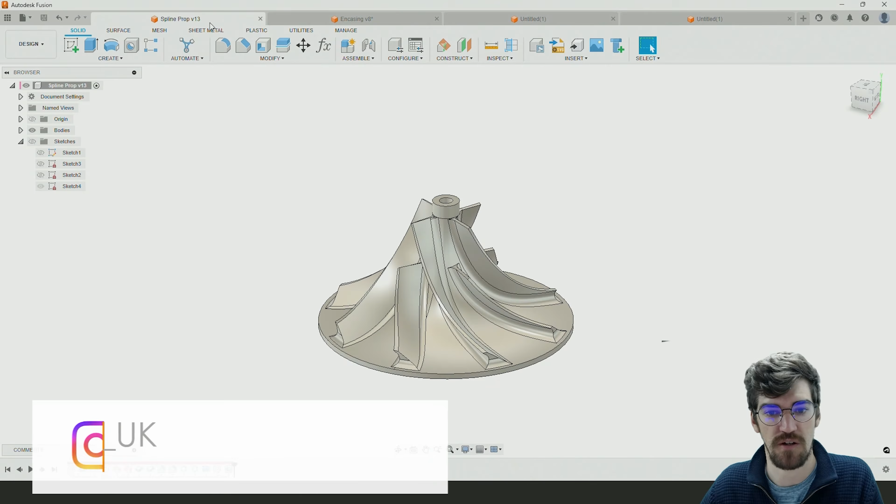We're going to start off with the propeller itself, or the turbine itself, where we want to create this component, or at least a lot of the detailing, just to simplify things. We're going to just do a lot of the detailing of the propeller itself on a single sketch. So I'm going to start off with a 2D sketch.

We always want to begin by starting with the 2D geometry that we want to then bring in. Unless we have the parameters, we might want to go and place down parameters first. But for the sake of this one, we're just going to start with a 2D sketch.

I'm going to be using the side or the front plane to design this from, because I'm going to be designing from the front, but obviously choose whichever plane you find relevant for the model you're creating. So the first things we're going to take a look at, if I have a look at the component that I've kind of tested this on...

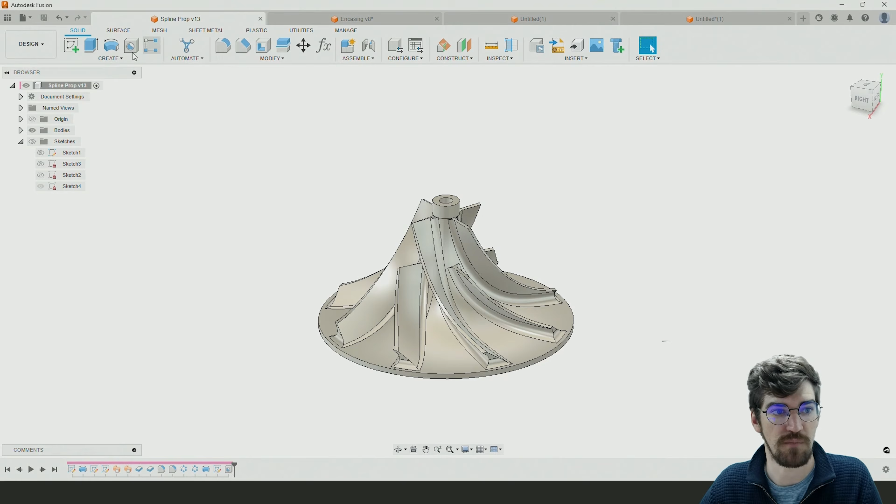We want to obviously have a bit of a thickness to the bottom edge of the root of the turbine itself, so we want to be able to have that little bit of thickness there. We also then need to establish a height, and then we want to be able to have two separate profiles for the root of the impeller itself, as well as then we want to, in the same sketch, be able to determine the shape of the blades themselves.

By simply going in and adding in our lines, I'm going to start with the line tool up at the top left and start from the origin. We always want to try and model as close to the origin as we can, or at least for dimensioning purposes. In components, we want to be modeling around the origin.

So I'm going to go with the first line straight out from there, to an amount. I'm not too worried in this phase, it's a conceptual phase at the moment, so I'm just going to be placing out a few dimensions, more or less to the extent of the outer part over there.

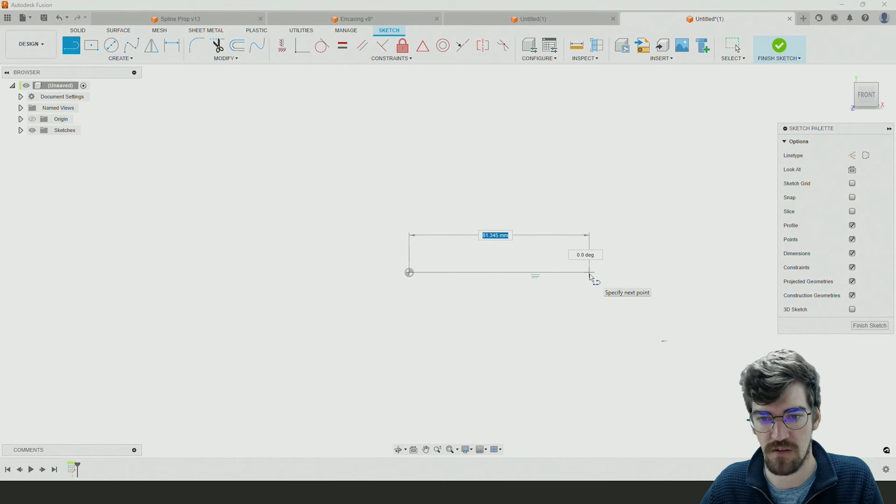And I'll go straight up from there to create that little bit of a thickness towards the bottom of the part, and then I'll come in with a spline of some sort along the way. For now, I'm going to hit escape to finish that line off, and then pretty much do a similar process on the top half of the component.

So going straight up for the vertical edges of the part, going straight up by, again, an amount. I'm not going to determine exactly how much just yet, just going to go straight up.

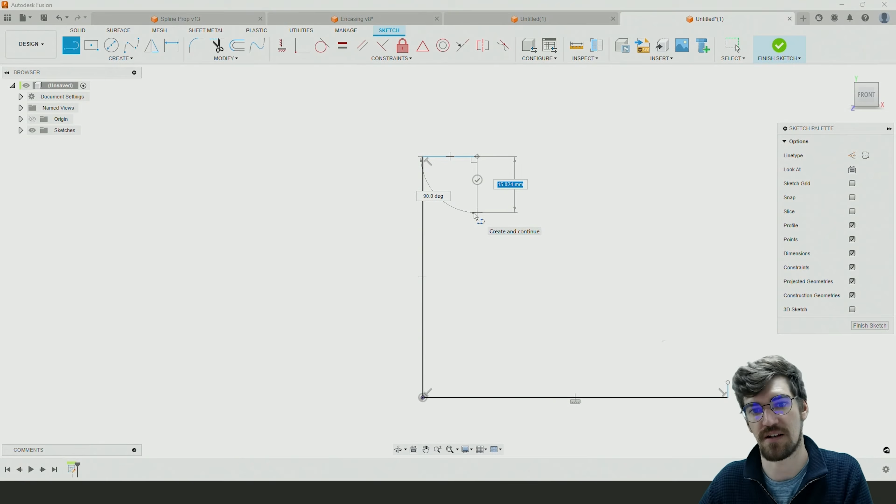Going to have the upper diameter of the cylinder itself, again by an amount. Come straight down, because I want to have at least a little bit at the top before it then goes down into the root, and place it in something like that.

Now, to finish off this curvature to the component itself, I might have just a little bit of an edge going in on the end of it over here, which will be variable later on down the line, but I want to have the option for just having a straight edge over there.

And then I'm going to use the new blend curve tool available to us, just to be able to connect those two lines together. This will connect any two lines with a curve. So you select one half and then the other half, and you've got the ability to then go and place both of those in. Just by selecting the nodes at the end of that line, I can come in and adjust the intensity of that if I wanted to.

But otherwise, as these lines move up and down, those will continue to be tangential to the vertical and horizontal lines respectively, allowing us to keep that nice and neatly in line with itself.

Again, the next step over is we want to create the geometry of the blade as well. So using the same line tool, I'm just going to go off where that tooth starts from. I want to have that set as my blade height from the bottom of the part up to this point over here.

So I'm going to go and specify that this is later on down the line, this is going to be the blade height. So thinking more or less of what I want to add in later on down the line, but not adding too much detail at this particular point in time, just kind of eyeballing it as we go through.

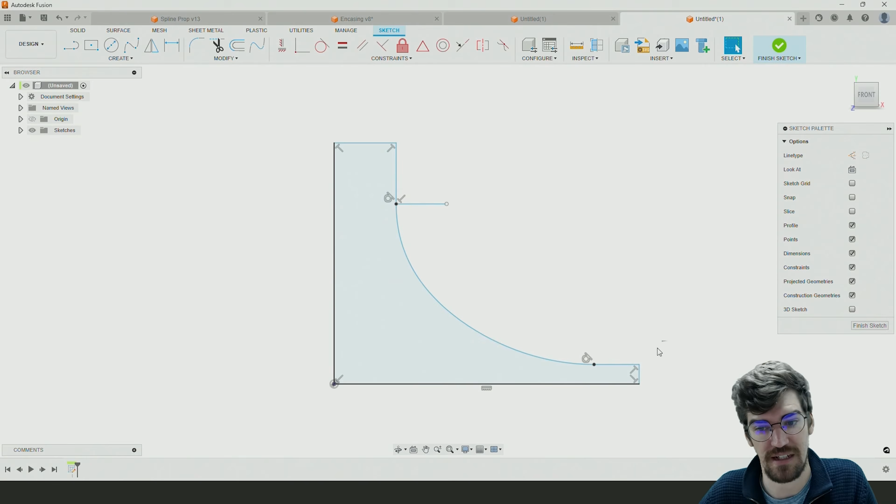I might also not want that linked to that node over there itself. I might want it a little bit further along, making sure it's not snapping to anything. So I'll go a little bit further along and place that down over there if I want those as two separate values.

The next thing, again, just going to go and place in either a spline or a blend curve along the way. So if you want a blend curve, it's not quite going to work if I go between these two points now, because it's going to try and make sure that they are tangential once more.

So what I might do is put some construction geometry in to begin to drive the angles of those as well. By changing inside of the sketch palette to the construction line instead, construction line geometry won't be used in the formation of solid geometry later on. So when we do convert the sketch into solid geometry, the tool will completely ignore any lines that are using the construction line type as a tool within the environment.

So I'm going to use those two construction lines just to drive the angle. You can see that those are using constraints, a series of perpendicular constraints, ensuring that this line is always going to be horizontal, and this line over here is always going to be vertical, again with a series of perpendicular constraints, which we can see highlighted to us in the corners over there.

If you are ever wanting to add these constraints in, we'll have a look at some of the other constraints a little later on, but we've got the ability to add those perpendicular constraints, or if I wanted to remove a constraint, I can select the constraint and hit delete on my keyboard. It will then go and delete those constraints.

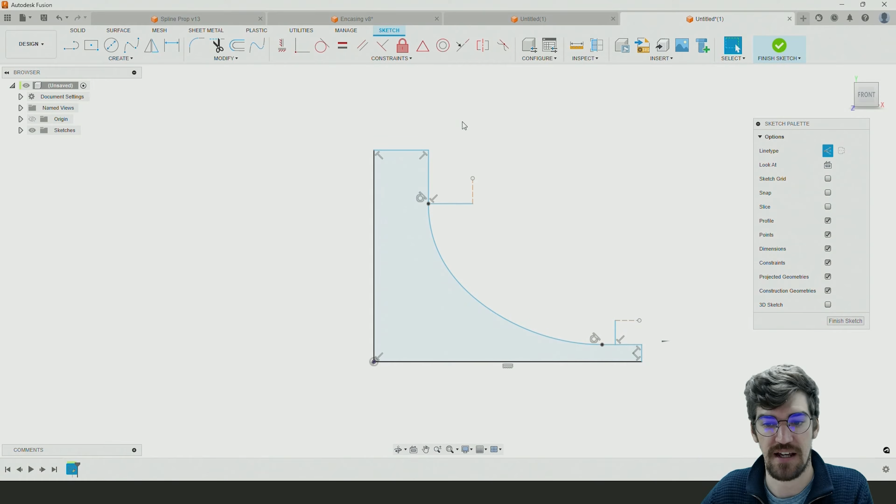And at the moment, that's able to just adjust to whatever it wants to. Same with this one. I could go and force these ones to be either vertical or horizontal by using the horizontal vertical constraint and applying that against each of those two, for those of you that don't potentially know that.

So using the blend curve, I'll just go and connect that line once more to this one. And currently it's a construction line once more, but I can convert a construction line to a solid line by selecting it, and in the sketch palette, disabling the construction line type against it.

Therefore, we've got two closed profiles inside of the sketch as it stands. So we can convert an existing solid line to a construction line, and we can convert the construction line into a solid line if we ever needed to.

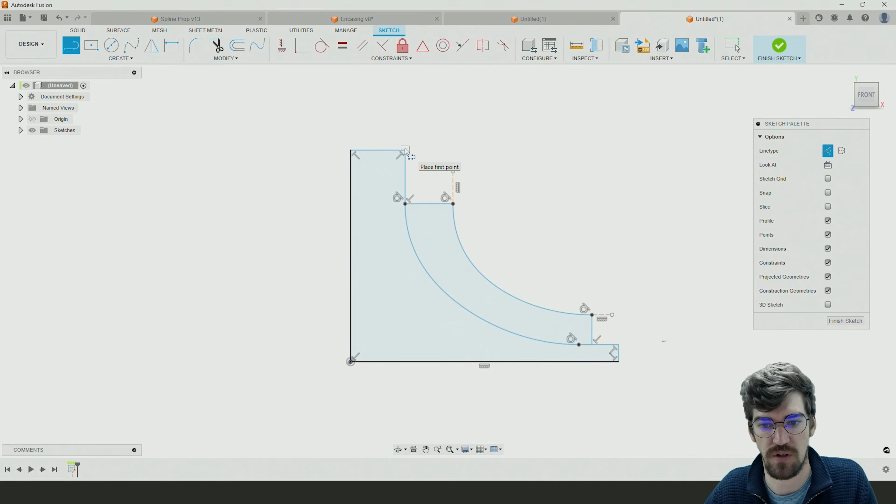The last thing I want to do very quickly on here is just close off this shape, just in case I need it later on down the line. So I'm going to go from my endpoint over here, horizontally across, disabling construction line, and coming down to somewhere in line with that, just in case I need this last closed profile later on down the line to cut any geometry that is unnecessary.

The hope is I won't need to use it, but we'll just have it there in case a little later on. Could always come back and add that in later on if we ever wanted to as well.

Last thing I will do, just for the sake of demonstrating it, for those again that don't potentially know this, if I add a line in here, right at the origin, right in the center of the part, and go straight down or straight up, doesn't really matter as long as it's there and it's vertical, I can convert that solid line into a center line.

When using dimensions, we can use center lines to determine diameters on either side of the center line if we needed to. So as an example, I'll create a sketch dimension between my center line and this vertical line over here. Rather than giving us the distance between those two points, it will give us a diameter.

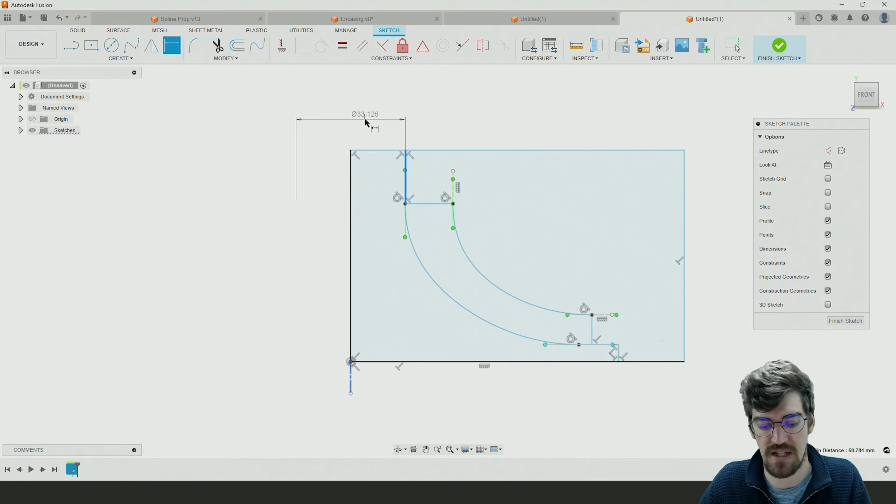The other benefit, which is why I'm wanting to use this one at this point in time, is now that I'm happy with the sketch, I can hit Finish Sketch. And because the type of geometry I'm wanting to create is a revolve, Fusion will automatically detect that center line for me, since it's the only center line available in the part on an unused sketch. It will automatically grab that as the axis of rotation for my revolve, so we can begin to add those in.

It's an extra click somewhere further back, but it might save you time later on down the line, especially if you aren't wanting your revolve centered around the origin, or you're wanting to define a separate center line elsewhere. In this case, we could use the origin for our axis, but just to point that out as well.

The profile we want to use, again, we're just creating this for the tooth for now - I want to grab, sorry, not the tooth, the root. We want to grab that profile and sweep it around. Using the revolve, we've gone and created the profile nicely, hit OK, and now we've got the base for our component. We can later add parameters to worry about the shape, size, and height along the way.

Once we've got that set, the next thing we want to do is start adding the blades on. With those blades, we want to take a profile and pull it up to a certain height, with some rotation to it.

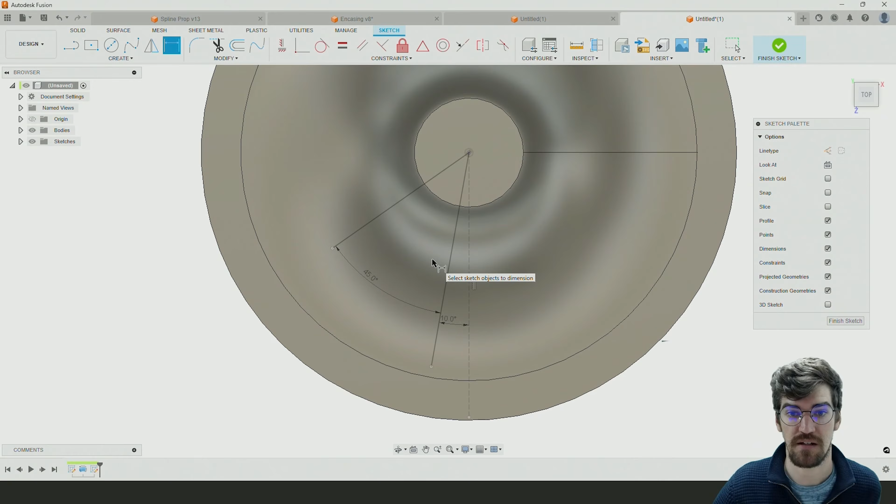Because the component we want to create will have the option for this splitter blade as well, I'm going to create a second line just to the side of the main blade. I'll pull this out to somewhere along there and give it an angular difference of 45 degrees between our main blade and the splitter blade, which ensures we've got the ability to go to 4 blades potentially.

This splitter blade will always want to sit halfway between the two, and later on, when we're creating parameters, we can begin to push those as well. Now that I'm happy with those two, I'll go and hit Finish Sketch.

And we can go and begin to use the surface modeling to finish this off. The last thing I need to make in this model is a path for the sweep to follow along. At the moment we don't have a path for it to follow, and that path I'm going to set right on the origin itself. So I'll create one final sketch, on the origin plane itself.

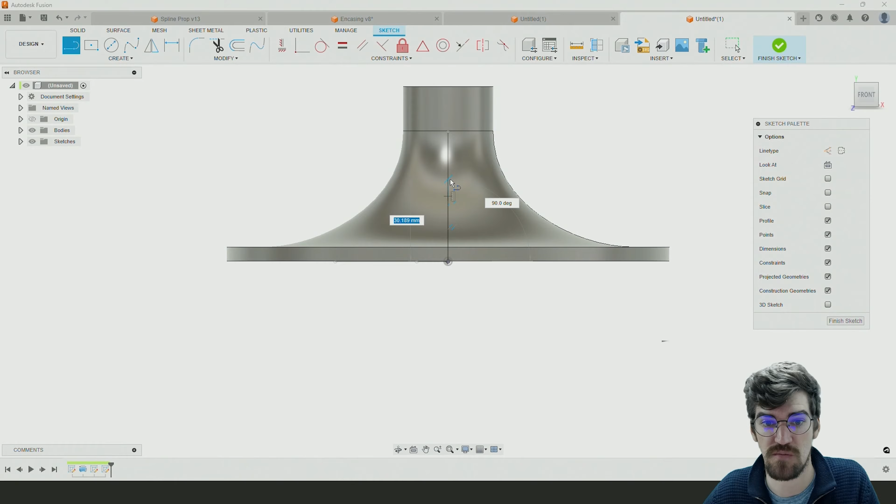The same plane, or the front plane at least, the same plane that we created the original sketch on. I'm just going to create a line that goes all the way straight up to the height of my blades. I'm going to make two separate lines, one for the main blade and one for the splitter blade, so I'll make a slightly smaller one over here, and use the two of them separately.

So now that I've got those two as a guide, I'm going to go over to my Surface tab. Inside of Fusion, we've got different types of modeling available to us within the design workspace. Some of you might only be familiar with solid modeling. We've also got surface, mesh, sheet metal, plastic, and so on available as well.

For this one, I'm going to go over to the Surface Modeling tab to create a single surface rather than a 3D component or a solid object, just to make sure we've got uniformity to this. In the Create drop-down, I'm going to grab the Sweep tool, which is also in my toolbar at the top, to create a swept surface. I'm going to use the single edge of this longer or wider line.

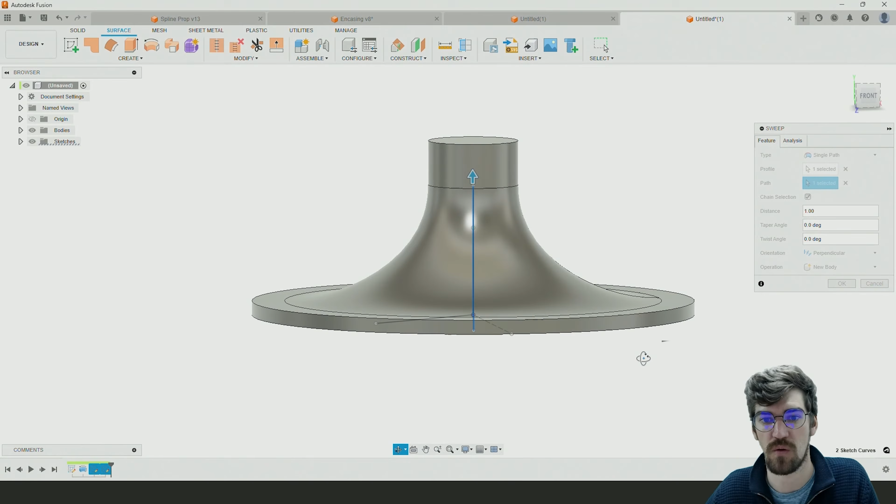As my path, I'm going to use the longer of the two lines once more. You can see it's just going to do a single surface with an infinitely small volume to it, so it's just a single plane that we're essentially creating at this point in time, and this is what we're going to use to drive the overall component.

We've got the ability as well to create a twist angle, so how much we want to twist this by as we go from the start position to the end. If we do 360 degrees, it's going to do a full rotation anti-clockwise around the component. We want to go clockwise, so we can drop that down to a negative value and it'll then go clockwise around. I don't want it to go the full 360 degrees, only 90 degrees.

I want the bottom of the blade to start where the previous one will end. So if we create 4 of these around the component itself, I want the start of one to begin above the end of the other essentially. Once I'm happy with that, I'll hit OK.

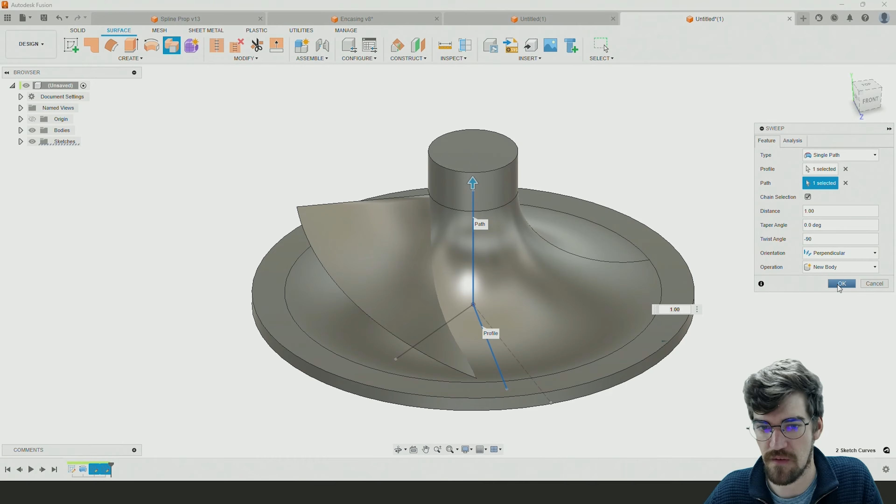Then I'll just repeat the process for the second one. Using the sweep tool once more, I'll enable the sketch visibility against both of those two sketches we created, selecting profile 1 as the driver of the geometry, and then the third sketch line, the shorter of the two, as the driver of the direction for my line.

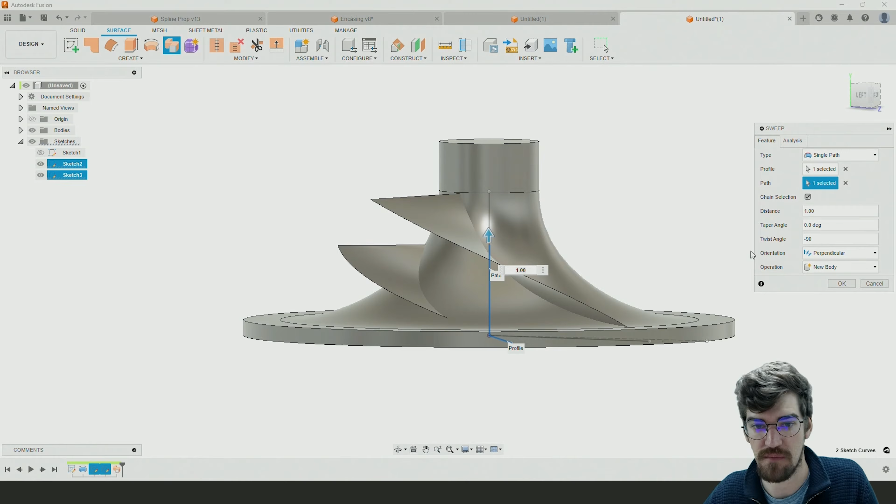Now this one's slightly different because we need to rotate it by slightly less than the same 90 degrees. If we do 90 degrees or negative 90 degrees again in this case, it's going to end a little bit further along than what we need, just based on the height of the component itself, from start to end. So later on we're going to need to work out a ratio between the start and end point for that, but for now I'm just going to leave this as is.

Maybe multiply this by 0.7 just to give it about 70%. So to multiply, I can just type in the parameters times by 0.7, and that'll then finish, for now more or less where we want. We can always go in and adjust these values later on.

Once we've got those set, the next thing we want to do is go in and thicken these two surfaces. Because I've started this surface right at the bottom, I want to thicken towards the top of the part, just so that I'm not going below the bottom of the part itself.

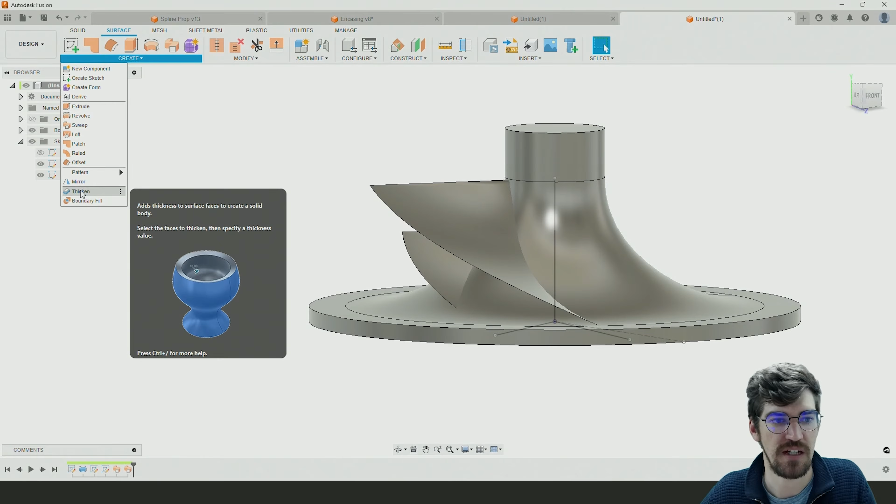To do that, I can again go into the Create section. From the surfaces section, we've got the ability to thicken any surface inside of Fusion. Using the thicken tool, we're going to be creating solid geometry during the process. Using this surface, I'm going to go in the opposite direction by an amount, in this case about 2 millimeters, negative 2 millimeters. I'll hit OK on there to create one solid. It's going to be created as a new body for now.

Actually, I can probably make this as a solid, so I'm going to join this one, in this case, to the original. New body will just create its own single body, which will be able to be edited on its own. By joining it, anything I do to this component might include the root itself.

I'll do the same, repeating the process on the smaller of the two blades by going -2. Again, we can turn this into a parameter later on.

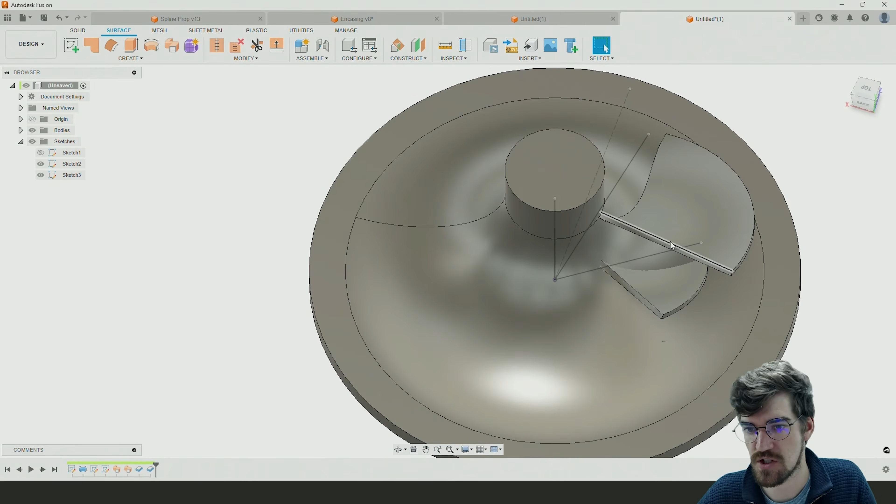Now I can see that shorter blade, though it is smaller, I might not necessarily want it to be narrower. I might want it to be the same full length, but that's easily adjustable now. All we need to do is edit the parent geometry, in this case the line, and any adjustments I make to that line now will be done against the surface.

So we can again start to go in and drive those values based on some parameters. We can add parameters to those and link those together as we go through. Just to prove that quickly, I'll go straight into the sketch itself that is being used to drive this.

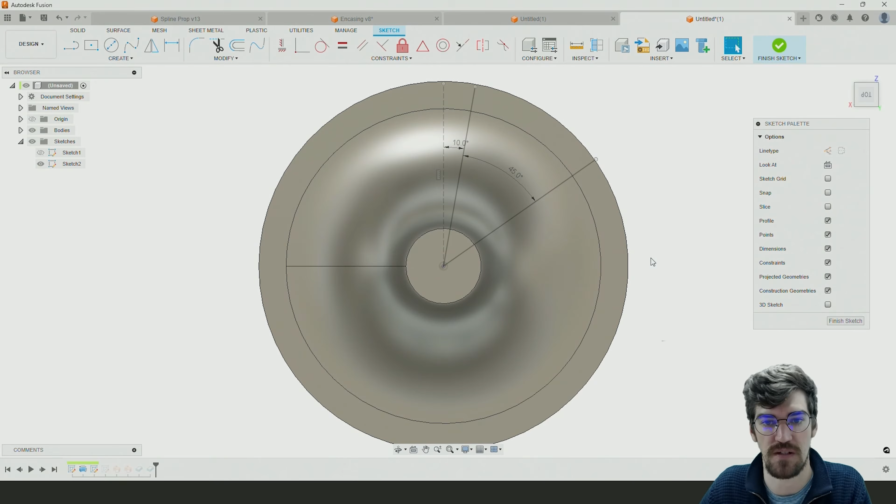We always want the blades to go up to the end, or at least the creation of the surfaces of the blades always want to go up to the edge of the component itself. So to do that, first I want to look at the external surface of the component and add that into this current sketch. I'm going to use the project geometry tool, which can be found under the create panel, project, or include project, or by tapping P on my keyboard, I can grab the project geometry tool.

I'm going to go and project the external edge of the existing component onto my current sketch. I can either do that by specified entities or an entire body - I just wanted the specified entity. I'll hit OK, and it's going to create a projection link.

Anytime that geometry adjusts, so will my geometry on the sketch. I can then drag and drop each of those endpoints onto the geometry itself, and it'll create a coincident constraint between the outer geometry and the endpoint itself. Therefore, wherever the geometry moves, the point moves as well. I could do that manually also within the constraints panel.

I can go and grab the coincident constraint, create a coincident constraint between the endpoint of that line and the outer edge of the part, and if I wanted to, I could do the same on that one. Once I'm happy with that, I can hit finish sketch, and those will be set.

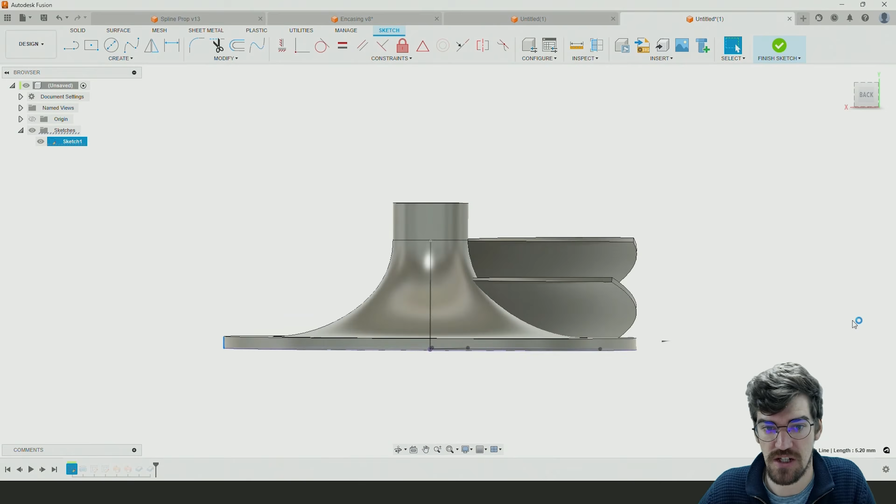To test that even further, I could go straight back into my original sketch, adjust the location, I guess the diameter of the component itself, hit finish sketch, and we should see that that's now wider. Not only is it wider on the original component, but it's also wider on the blades as well. So we've got that link between the two.

The next thing I want to do, just to get these blades the correct number around, we need to go back to the solid geometry tab. We could do this from within the surface create if we wanted, but I'm going to grab it from the solid modeling side. In the create drop down, we have the ability to create patterns of 3D objects, so we'll go into the pattern panel and grab a circular pattern.

The components we want to create a pattern of are going to be each of these blades respectively. For now I want to pattern all of them. Later on down the line we might establish configurations with a splitter blade or without one, but for now we're going to choose both blades as part of this process.

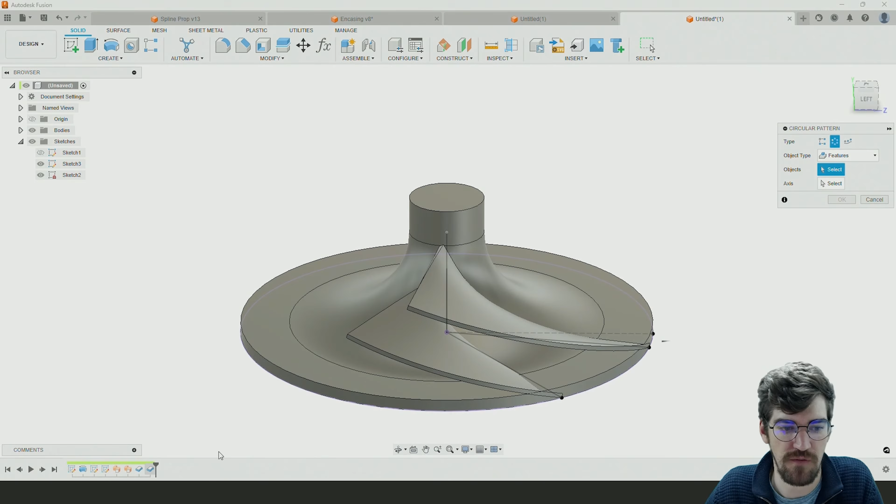You'll notice, because I've set the original surface and thicken creation to join, it's looking for an individual body to pattern rather than a single object. But we can change the object type we're patterning to a feature rather than a body, so I can go and grab each of these two thickens respectively, and it's going to grab both of them at the same time.

The axis of rotation is going to be the same axis we've been using up until now, which is the origin. I could go and grab the origin itself, the line that was used to revolve it, or any cylindrical reference that has the same center point as the component I'm wanting to revolve around.

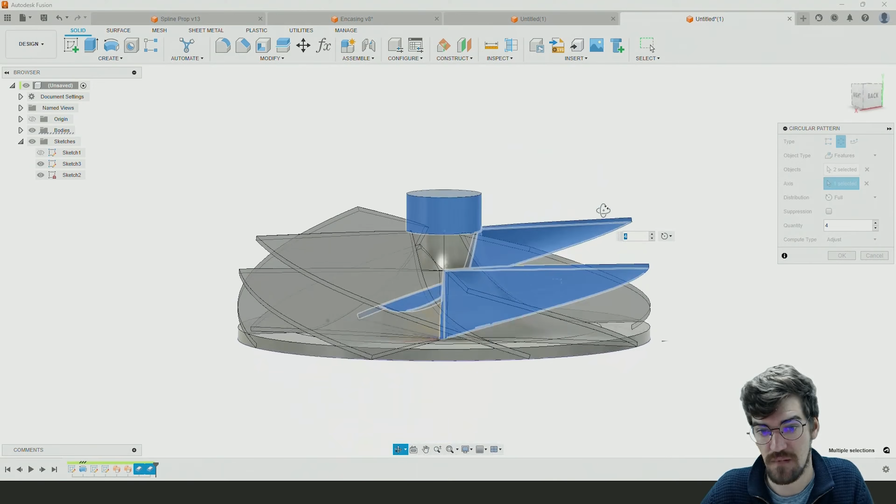Then it's going to ask how many instances of this pattern I want. At the moment there are 3. I can bump that up to whatever value I want, and in this case I probably want 4. Once I'm happy with that, I'll hit OK, and we've now got the blades going around the component itself.

The last thing we want to do to finish this off nice and neatly is cut away the remaining geometry. So we'll use that same profile we created right at the beginning on the first sketch, and then use our combining functionality within Fusion to combine two shapes together.

To do that we can do a revolve once more, but this time including the blade portion of the same sketch. Using my revolve tool once more, the same tool from the beginning, we look at that exact same sketch, and using the original axis that was inside that profile, we go and grab the original profile plus the blades, holding down Control or Shift.

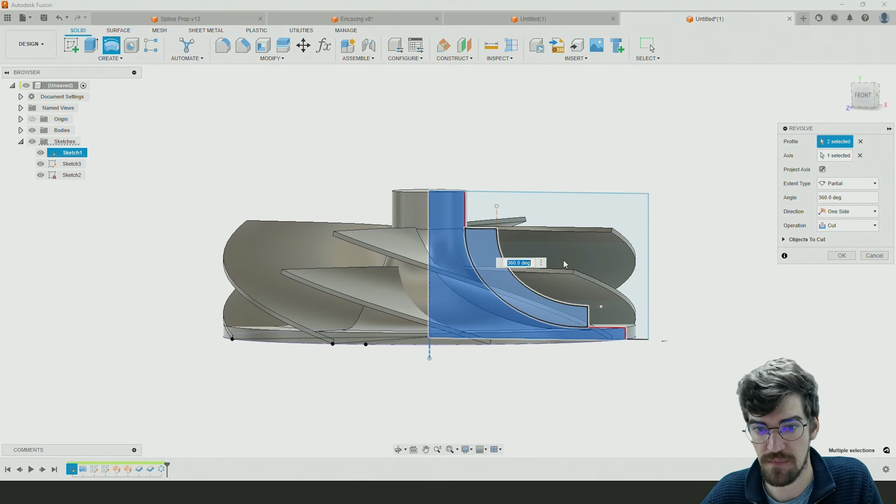Rather than cutting, which is the default anytime Fusion creates a new solid that intersects any other solid—because usually that's what we're wanting to do—in this case we're going to change the operation type, which changes how it views that revolve. Rather than cutting, we're going to use intersect, which only leaves behind anything that was intersected with the revolve we're creating.

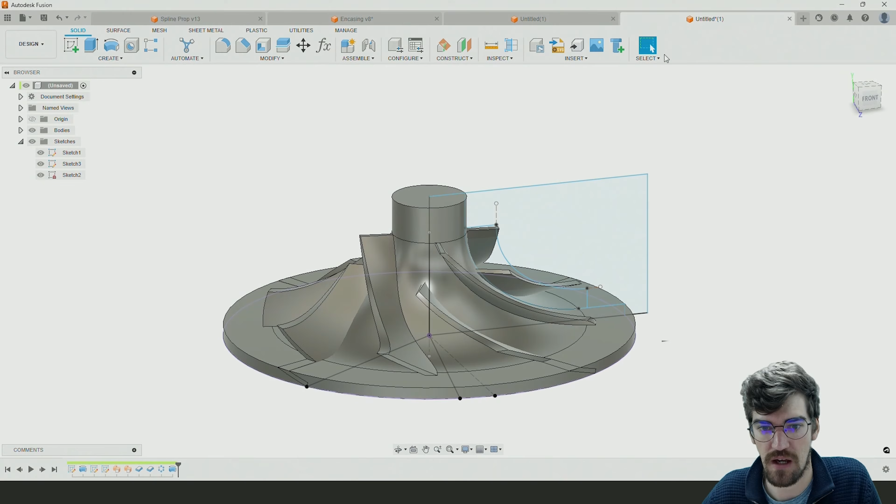Basically it's the opposite of our cut. So rather than cutting away any geometry in the firing line, we want to cut and leave that behind in this case. I'll hit OK, and we should now have our profile nice and neatly set. It doesn't quite look like this one does yet, ours is a little short and stubby for now, but we've got essentially the makeup we need as we go through the rest.

Now we can start to use that same sketch to get a good understanding of where each of those components is located and how big or small they are, their widths and so on. Using that same sketch we've been driving up until now, we don't have to go straight into the sketch to edit it, although most of the time it's recommended. We can start to adjust the sketch directly from the 3D modeling environment.

I can go and drag that up, and you can see by dragging that line up, the 3D model itself is pulled up as well. By dragging the top of the blade up, I can bring this all the way up, and we can see that that's also going straight up.

I'm going to drag and drop that directly on the top face over there, just so that it creates that constraint between the two. It's always going to move up with the top of the sketch itself, and therefore we've always got a line that is vertical, and that blended path is always going to come straight down from there.

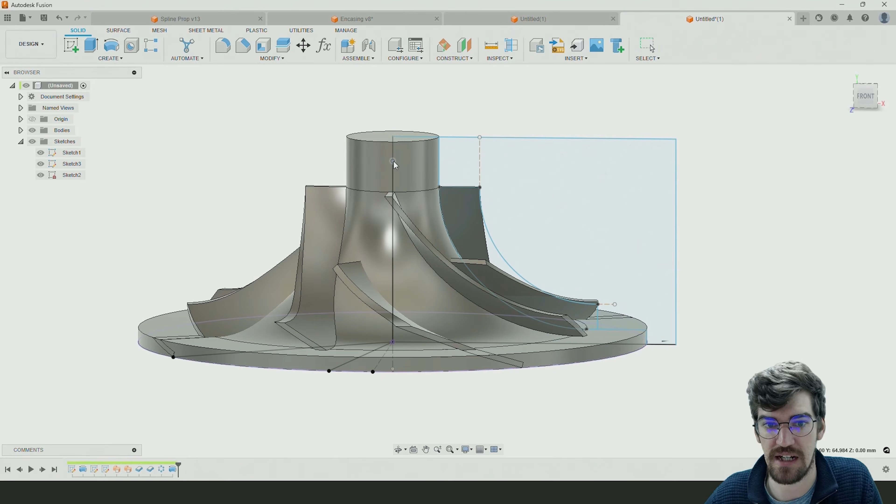This one doesn't seem to be updating all that much, and the reason for that will be the line that is driving the original sweep itself. So if I pull that sweep all the way up, potentially all the way to the top, although I don't necessarily want it to be all the way up, if I bring it a little bit higher up, we're going to have that driving as well a little later on. But you can see by changing that, we can get a slightly sharper incline towards the end of our part, just by adjusting the frequency of that.

We can do a similar thing with the smaller of the two blades. We can drag that up a little bit, and we should start to see the splitter blade do the same thing.

If I pull this out a little bit further, again, I should start to see the blades go out. I'm going to go and drive that construction line all the way to the end, until the outer extents of my part. And then that way I can come in and adjust not only the diameter of the root, but also the diameter of the blades, and even the height and thickness of those blades as well.

So if I want to make it slightly longer, slightly shorter, we've got a fully adaptive model now that we can begin to work with. And that's essentially the basis of what we want to do inside of this. Yes, we've got a few components that fit together in a bit of a messy way, but for now, this is essentially what we're wanting to make use of in terms of the creation of the component.

Once we then start to add a bit more detailing, we can come in and add some filleting just to neaten the corners off to make it a bit more manufacturable. We can start to add parameters and toggles to switch between those two.

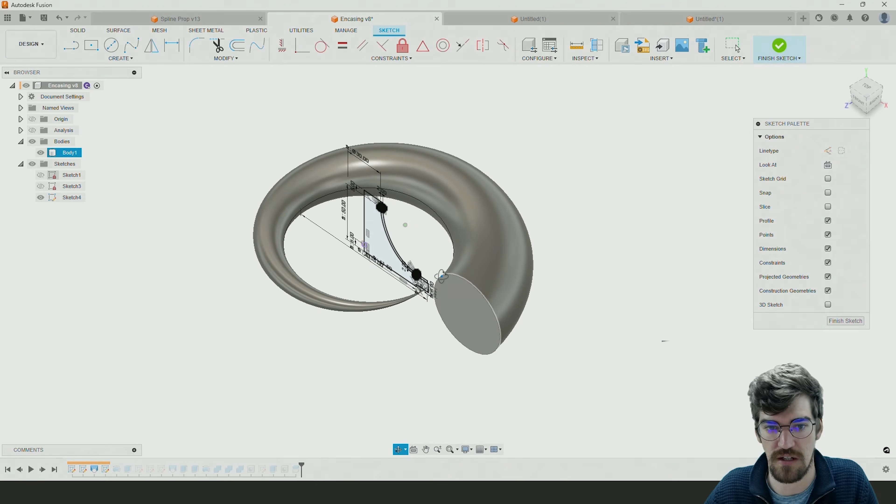The other part that we want to make, which can be a lot heavier in detail, is the encasing itself. If we look at how we've created this one, we've got a single sketch that drives the core of the component, the core profile of the component, and then we've got a secondary sketch that's going to drive the cone. As it's pulling the air in from the top and distributing that out, we've got a cone that's going to need to be created as well.

And then on top of that, to combine the two shapes together to get the input, push it out to the output, we've also got a loft that is connecting the two together, and that's going to be using a single round diameter that we want to be able to specify. That's then going to go into a conical shape while revolving around itself. So we want to be able to create all of that geometry as part of this process.

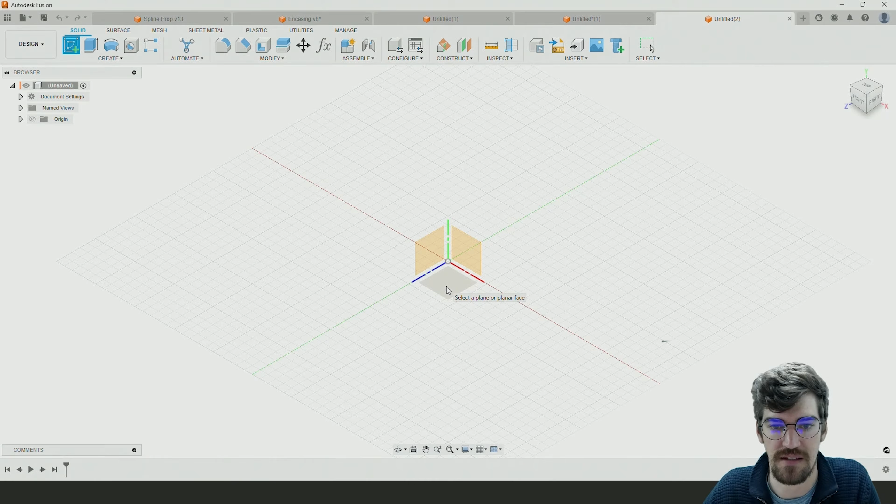So I'm going to go and create a brand new component, again using the plus icon to create a brand new design. Once more, we're going to start with a 2D sketch. This time we're going to be on the ground plane to try and get the layout of the output nice and clean to begin with. So I'm going to go and place my 2D sketch right on the top, looking at the top down.

Using a center diameter circle, I'm going to first specify the radius that I want for the housing itself, for where the impeller itself is going to sit. I'm not going to worry too much about sizing on this one, but I'm going to say it's going to be more or less 90 mil, maybe 95 or so. So I'm going to place it somewhere like that.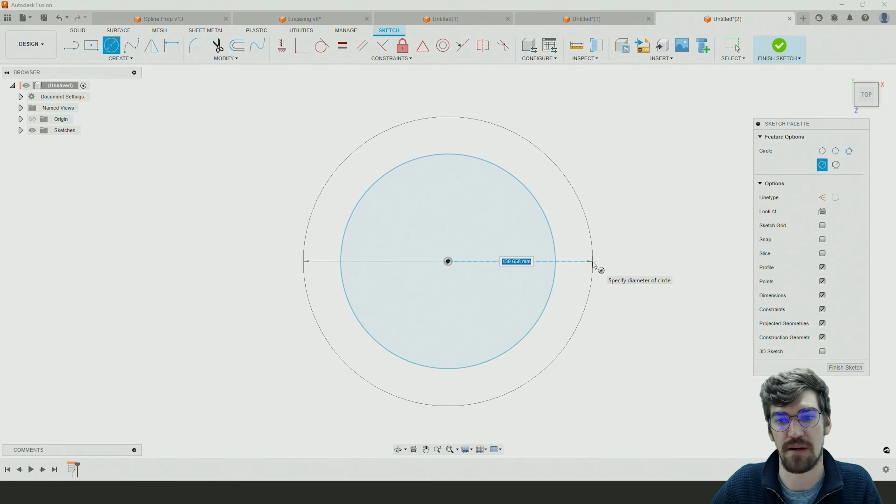I then also know that I want to have a bit of a gap from there to the center of the channel that the output is going to be located at. We want to then have that push out, so we're going to have a little bit of a lip, and as the cone comes out from there, it's going to have a little bit of an offset as well.

So it's going to go out. We've got that at about 90. Let's go around 130 or so for now, and place this one right over there.

I'm going to go and change this line to a construction line so that it isn't taken into consideration during the creation of any solid geometry later on. Then we're going to establish a final location. We want to go straight out from there, using a line tool rather than the circle tool, straight out to that point. Again, as a construction line, just to get a point in space that we can begin to take a look at.

The way we're going to do this is try and reverse calculate the starting point and the center position of the output itself. Because we want to be able to drive how wide the diameter is at the output, and everything else follows in from there, we want to first specify where that output point will be located, and the rest will follow from there.

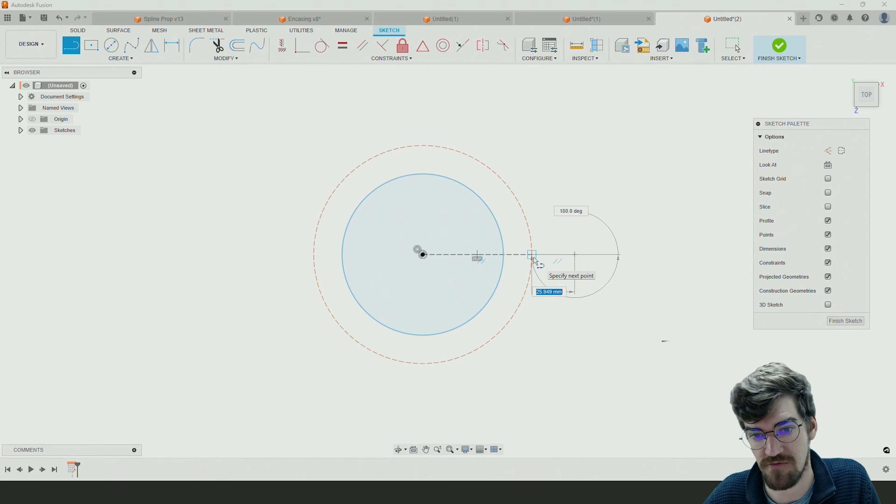So if we know that we've got a diameter of around 50 mil, we then want around about 25 mil at this particular point in time. Hopefully that makes sense, but essentially what we're doing is going into the sketch and creating this line to specify the center of the diameter of the output.

So if I go out of the sketch very quickly and toggle that first sketch on, we've got the center of the cone itself right over there. And because we want to reverse calculate that, we need that point first, and everything else will essentially follow from that.

So what we want to do then is come into our create panel, and we're going to try and create a spiral from the start point over here and slowly work its way out to this point over there.

So we're going to go into the create panel and grab an arc tool, then grab a center point arc. Because we know that we want the arc to be slightly larger than the radius of the driving line for now, we're going to start our center point arc. We also want it to be tangent to the center line of the channel itself.

So I'm going to go off to the side over here very quickly, by an amount I'm not too worried about yet, and place this point over there to start off with, ending vertically in line with the center itself. I then want another arc that's slightly longer than the original, so I'll go off ever so slightly, place that point, and go again another 90 or so degrees. I'm just going to repeat that process until I have an arc that will be in line with this.

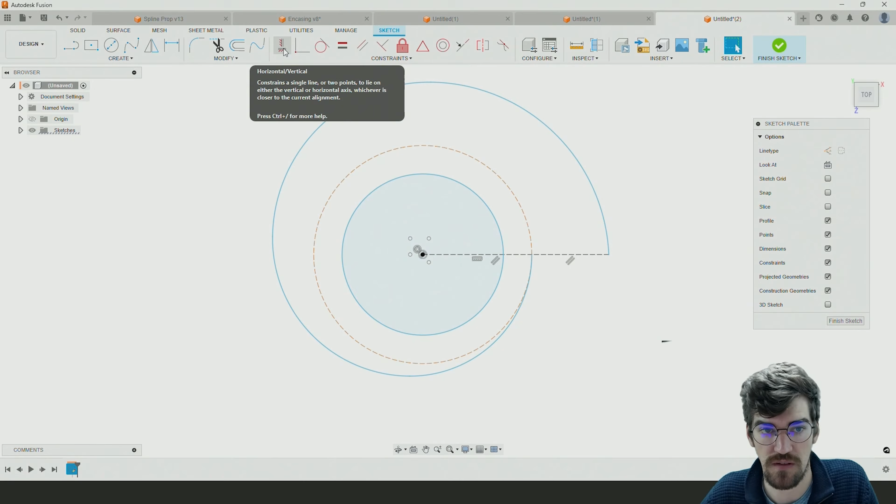So I'm going to then drag those two points so that they're coincidental with each other, the end point of the arc and the end point of my line. I'm also going to ensure that these arcs are always in their correct position, using the vertical and horizontal constraint between the center point of each arc and their end point.

So grabbing this line, this point over there, I'm going to align these two vertically. This one over here, I'm going to align vertically, as well as these two over here. Then repeat the process, this one to that one to that one, this one to that one. So vertically aligned, horizontally aligned, vertically aligned, horizontally in line. That way, as we adjust one, it should start adjusting the others as we go through, keeping those in position.

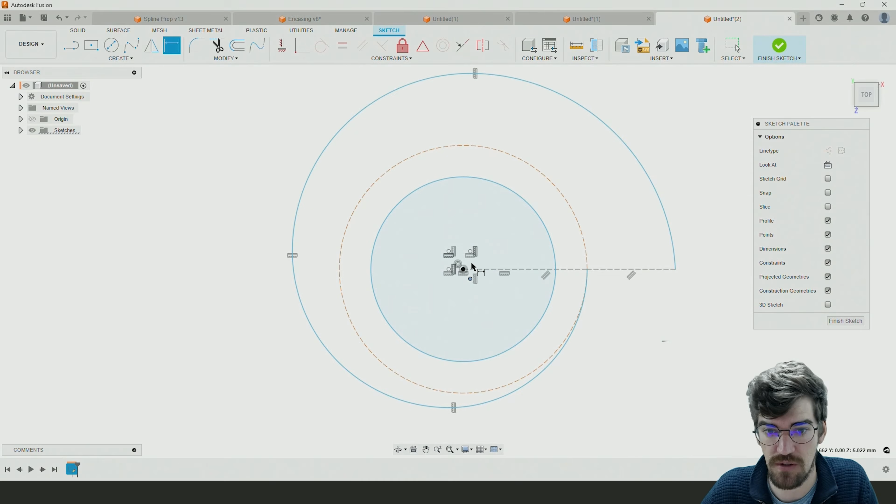At that point, we can then start to establish the ratio between each of these components. We can go and say that we want to dimension these two — I'm not going to worry too much about the exact value, but for now set these to 15 millimeters. We then want to take the remainders and halve that each time, so I'm going to take the distance between these two and say it needs to be equal to whatever value this one is, divided by 2.

Then I'm going to repeat the process between these two and say that needs to be divided by 2. And then lastly, this one to that one, which is equal to that one divided by 2. That way we tend to get a really nice curvature to those, ensuring that these are all going to be tangential to each other whilst increasing the radius.

You can decide on the ratio that you want. We can add parametrics in there to make those a bit better. But now by driving those, you can see how it's able to establish the shape and size of these components for us.

By driving the radius or the diameter of this center line, we then also get to drive each of those. So if either of those begin to adjust, they'll start to push each other to various distances.

We can then also begin to dimension between these two points using that line over there. And you can see that as soon as I start to drive that, if I say for now I want that to be 25 millimeters, it doesn't quite like that one - a little bit over constrained. I'll just go and delete that one.

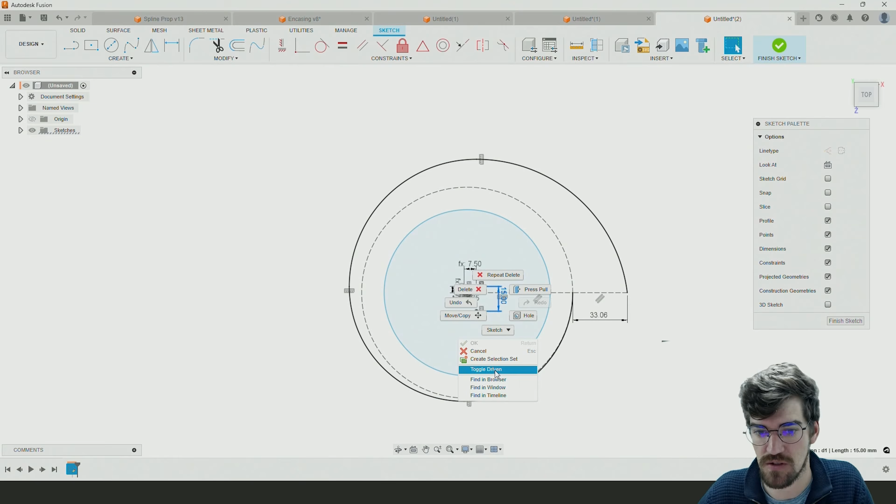Actually, rather than deleting, what we can do is toggle driven. So rather than this one being the driving dimension, I'm going to toggle it driven, and make sure that this one is the driving dimension. See if that fixes the issue quickly. There we go, and now the rest of them are all going to be driving.

So from there, we've got a nice way of being able to drive all of that. It's a long, fun way of getting to that point. Just bearing in mind that this 25 millimeters, that's predominantly the sketch done for now. I'm going to go and hit finish sketch, and then we can always add a bit more detail to this a little later on.

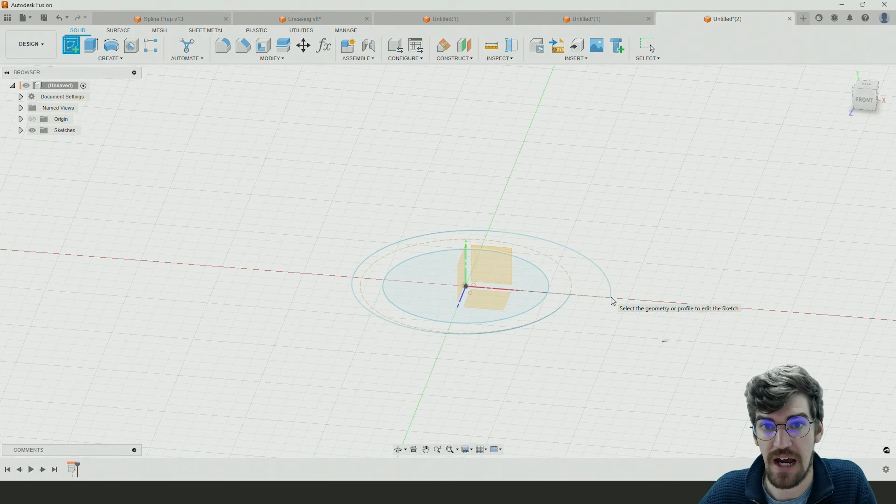We then want to go in and create a circular shape on this profile over here that we're then going to sweep down to nothing all the way at the end of that line. So again, using a 2D sketch, I'm going to go and create a sketch on the origin, which is in line with the end of that spiral.

Otherwise, we could create a construction plane instead on the plane along path, so we can use that path to make sure we've got a sketch on that path, or a plane on the path that we can create a sketch on. But in this case, it is neatly aligned to there, so I'm just going to make use of the fact that it is already there.

So I'm going to create a sketch on the plane that is intersected by that line, and using that same project geometry tool to get the center point of my spiral, I'm going to use the P button, grab the center point of that spiral, hit OK, and I've now got a referenceable point in the center of that component.

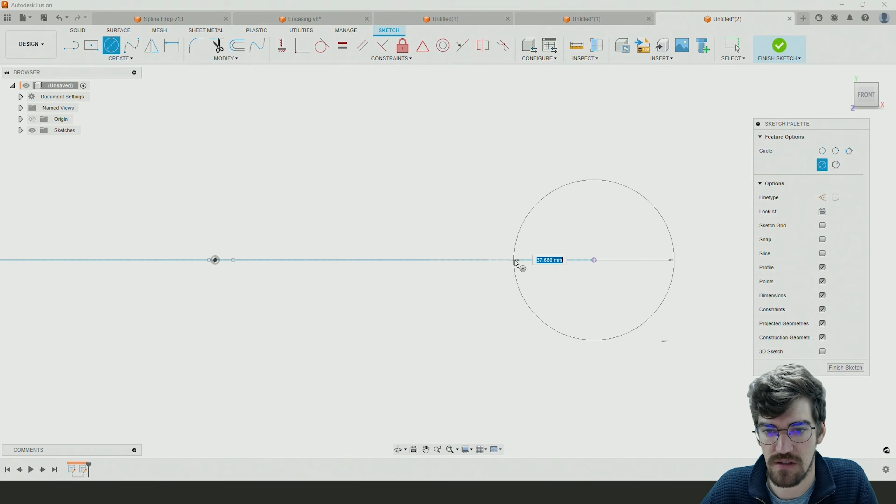I'll then go in and create a circle indicating the diameter of the part, which, if we make it 50, will be exactly in line with that point over there, which tends to cause a bit of an issue with our sweeps or our lofts. So I'm not going to go exactly that much.

I'm going to go maybe about 45 to begin with, which again we can adjust later on when we are starting to look at the parameters around the model itself. Again, this is just conceptual phase for now. We can begin to work on the actual full-on dimensions a little later on.

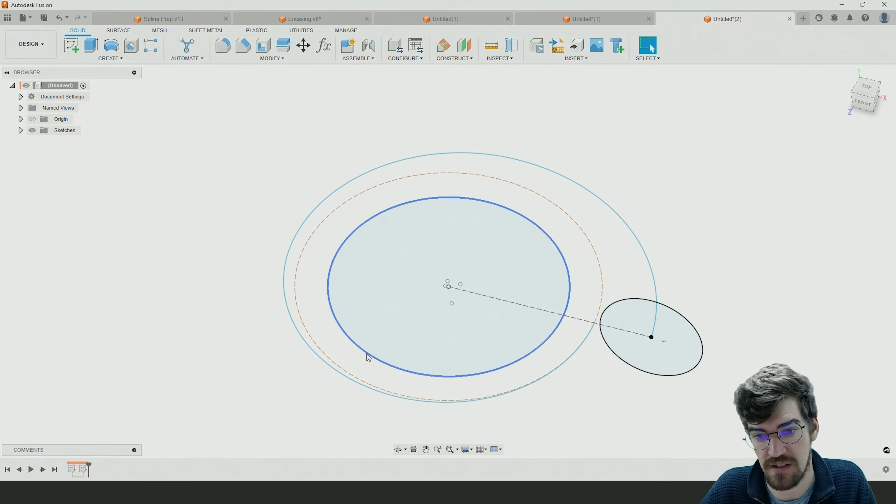So with that set, we can then go and use the loft tool to create the spiral down as we go through. So using the create drop down, we have the ability to go and grab the loft tool. Now the loft tool will allow us to create a solid object between successive profiles, or by going from one profile to another, or from one profile to nothing.

In this case, that's essentially what we want to do. So along the length of the spiral, we want to go from whatever diameter the output is to essentially nothing, therefore dividing the distribution of that profile along the length of the path itself.

So the profile I want to go and grab, in this case, is going to be that profile as our first point. And my second point, the end of the component, I want it to just go straight to that point over there. Now it's going to complain at the moment that they are coplanar, which is correct because they are right against each other, and therefore we need to guide it along a path along the way. So we're going to use our guide type as a center line.

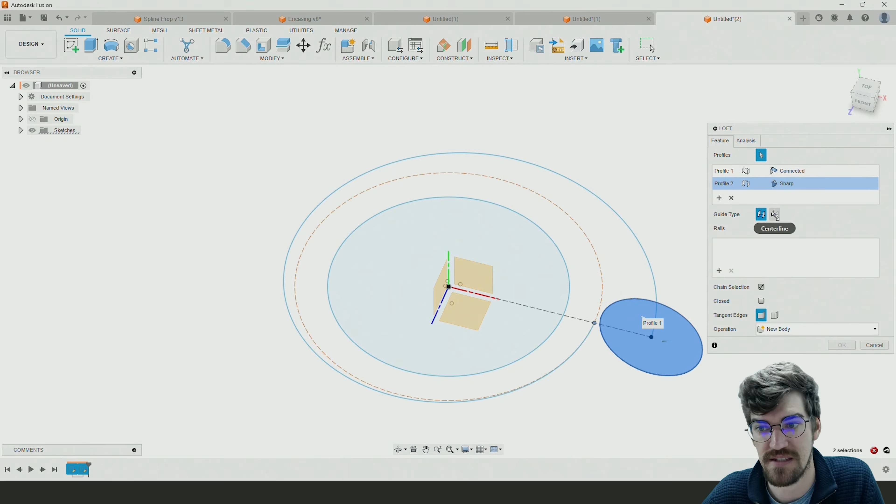The center line is going to make sure that as it goes around here, the center of the shape is always going to be around this line itself. So using my plus symbol, I'm going to grab this entire center line, and we can now see the conical shape as it goes and brings itself all the way to the end, evenly distributing that displacement of, in this case, air.

Once I hit OK on there, now we've got a shape that we can begin to make use of for either adding geometry or subtracting geometry a little later on down the line.

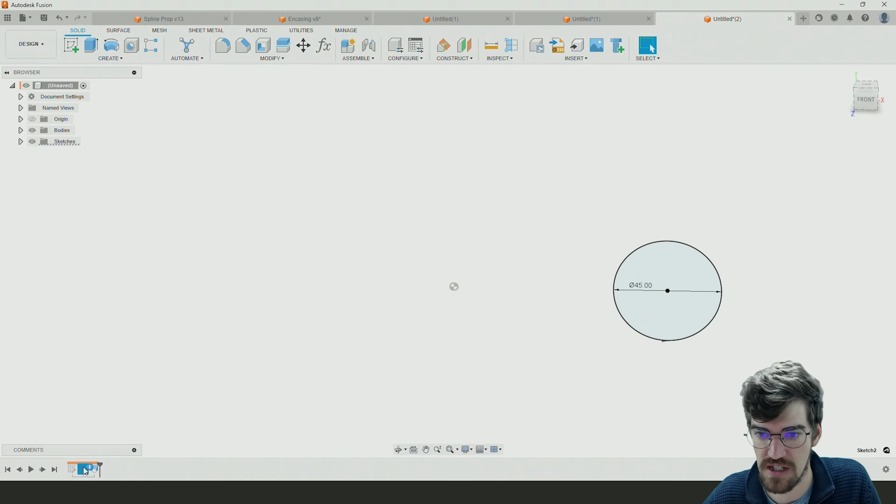If we then repeat that process, because we're going to want a shell for this, we've got the ability to go into the same sketch, so in our second sketch I might create another shape that's slightly larger. Again, not 50, but maybe 48 or so. We'll adjust these later with parameters, but slightly larger than that. Then a similar process on a second sketch down here.

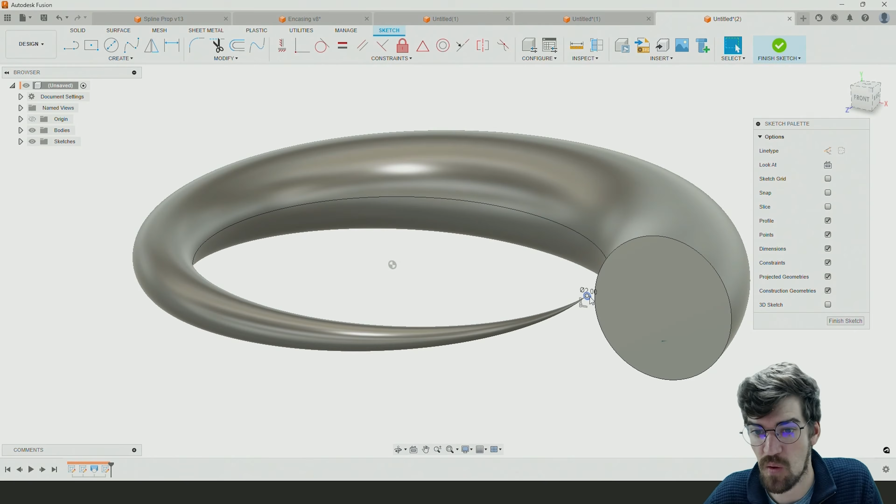Using create 2D sketch once more, I'm going to grab another sketch on the same plane, but it needs to be a separate sketch for this one. Again, I'm going to project the geometry of that point onto my sketch and create a circle that's about 2 mil or so for now, whatever the thickness of my wall is that I want.

And I'm going to repeat the process of creating that loft, essentially creating 2 lofts as part of this process, one for the shell and one for the subtractive process a little later on. So using the same 2 sketches, I'm going to grab that one over there, the entire profile, up to this one over here, and hope there isn't an overlap. There should be a slight gap, hopefully, if I've done this right, between those 2. And then I should also have the ability to add a path in there.

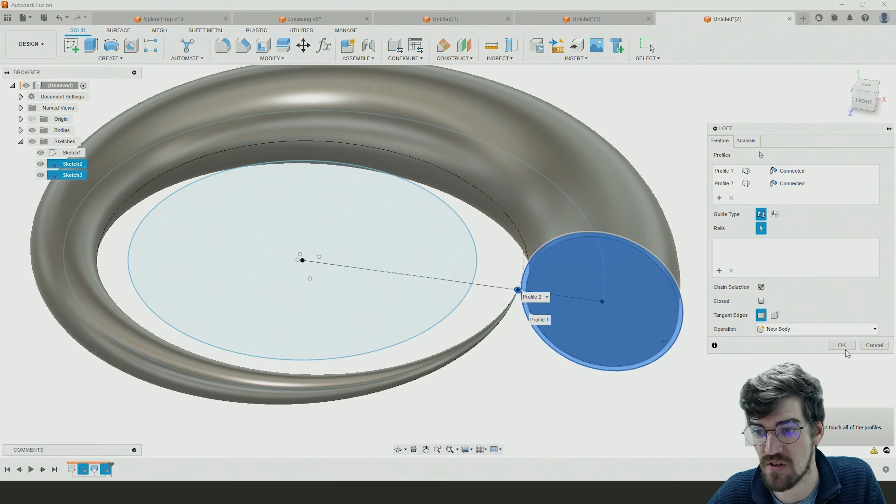There was a slight overlap between the 2 profiles, and it will struggle a bit if there is an overlap, because it's trying to calculate surfacing and it can't be intersecting itself along the way. So I'm just going to go back into this sketch and reduce that down to 47. That should be just enough to then complete that process using a loft from this shape to that shape using the center line in sketch 1.

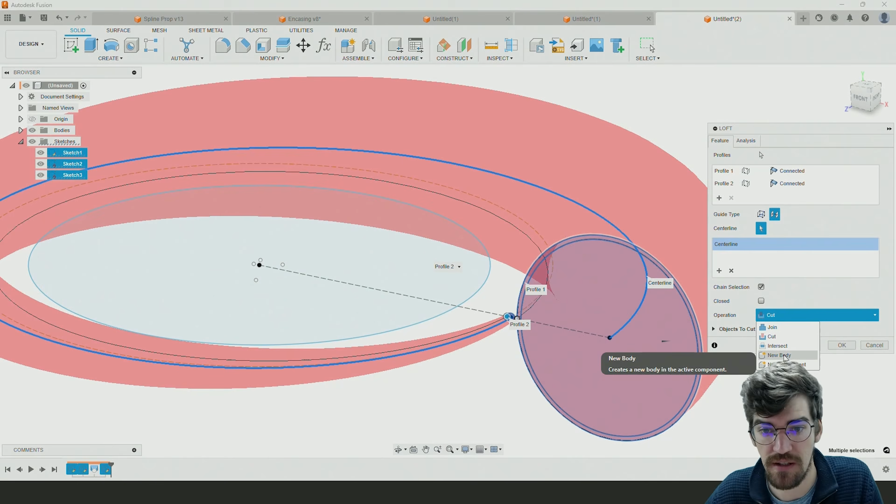We should now have a secondary shape that we can come in and add. So I'm going to add this rather than a cut. I'm going to add this as a brand new body and hit OK on there now. So I've got 2 bodies inside of this model, keeping them separate for now. We'll merge them a little later on, but we've got the first body, which is our conical subtract, and then we've got our conical shell.

So just by doing 2 single clicks, or a click with a bit of a gap and then another click, we've got the ability to rename components. Otherwise, we can also right click on a body or any feature that exists inside of the model, and we've got the ability to rename it from inside there.

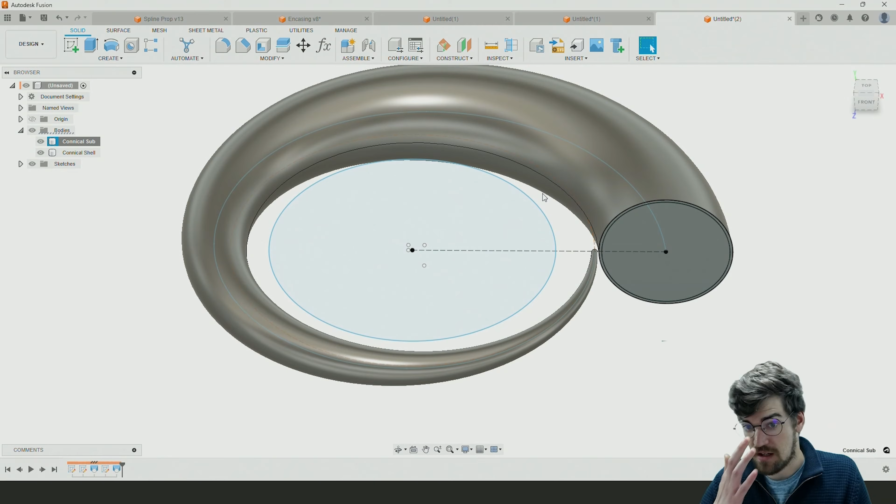Once we're happy with that, we then want to go and finish off the rest of the component, right? So using the same 2D sketch that we've used up until now to drive the outside of the component, we want to have the main body created at this point in time as well. So essentially what we want to do as part of this process is create a bit of an arc around the outside of the part.

So if I have a look again at the original sketch that we've used as a guide for this one, we've got that center line working its way all the way out from here into that point over there, the spiral itself. But then from that point, we've essentially got the outer perimeter of the component once the loft has been created all the way around. And that reaches about this point over there and goes all the way up to that point.

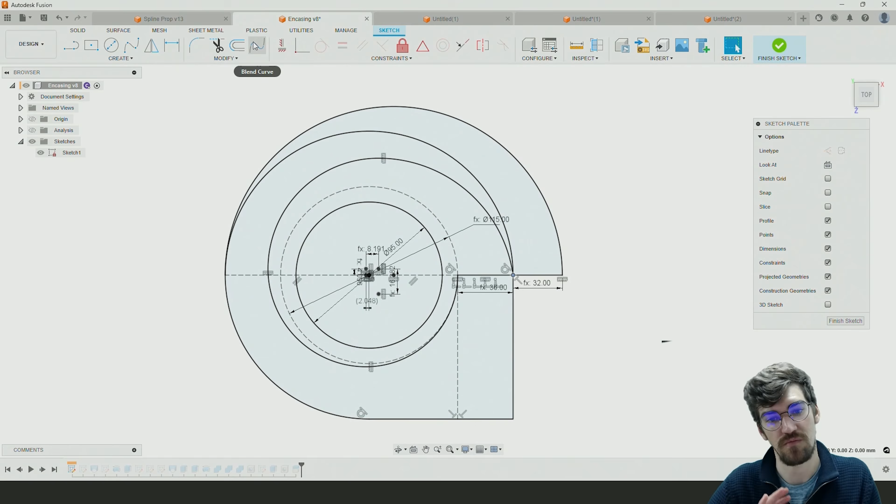But we've also got a cylindrical shape that's going to pick up the extents of the bottom half. So essentially we're breaking this up into 2 different arcs, or semicircles rather. The top half is going to take into consideration the extents of the overall loft with its own center point in line with that, and the second half is going to be centered around the origin itself, using the extents of the center line as a guide, just to make sure the overall shape has enough space around there in a logical, semi-logical way.

Hopefully that makes sense. So the first thing I want to do now is quickly create another arc, another center point arc for the lower half, using the same center point as the origin. I'm going from the center line of the part all the way up to a point 180 degrees around.

The other point is going to continue the same line equidistant, using a construction line once more, so it's not used in 3D geometry later on. I want this line equal to the 25mm line that's currently there, so I'll use an equals constraint to make sure the 2 lines are equal in length.

That way, if that line gets longer or shorter, this will continue to adjust. So I can create another arc, another center point arc on this line somewhere. I'm not too worried just yet where it's located, but I'll have its start point over there and its end point somewhere there.

And then I'm going to make sure that those 2 points are aligned to each other, which adjusts the center point of that line. But because that center point is now associated to this horizontal line, they're always going to be horizontally in line with each other. Hopefully that makes sense, but that's essentially what we're wanting to do for now.

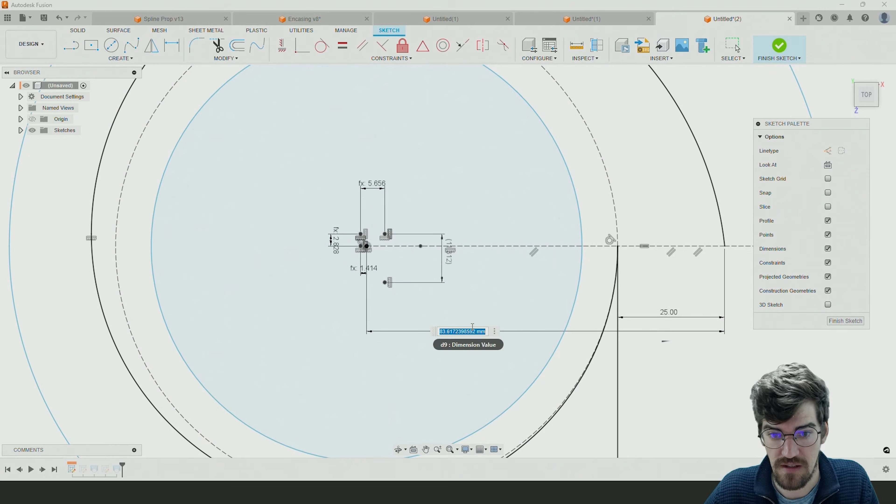And do the exact same thing down here. I've got a few different ways I can go about that. Either, again, a construction line between those 2 points and make sure they're equal to each other, or using this method, I can say that this is going to need to be a driven value. So whatever value this becomes, the other one becomes as well, making sure those two are always associated to each other.

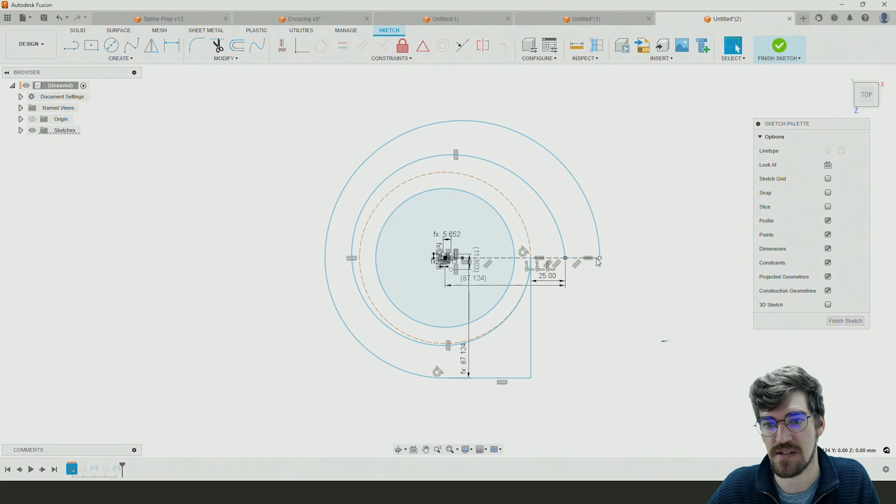Cool, hopefully that's making sense so far. So we've got our spiral all nice and neatly set in there, and that spiral is driving the loft. We then want to make sure that whatever the diameter of the loft is, the outer perimeter of the part is always in line with it later on down the line, and hence we've got these 2 semicircles over here. We've then got a closed profile between those 2 points.

I'm just going to close that off with a solid line. As an indicator, up until now, the only solid element is the inside circle over here, which has shading in blue on the component itself. But if I close this off, at the moment it's got a construction line between those 2 points. If I close this off with a solid line, I should see the entire inner perimeter solidify now, which is exactly what I'm wanting at this point in time.

So I'm going to hit finish sketch on there now. This should give us the ability to create geometry and start to thicken that component for the housing itself to sit inside of.

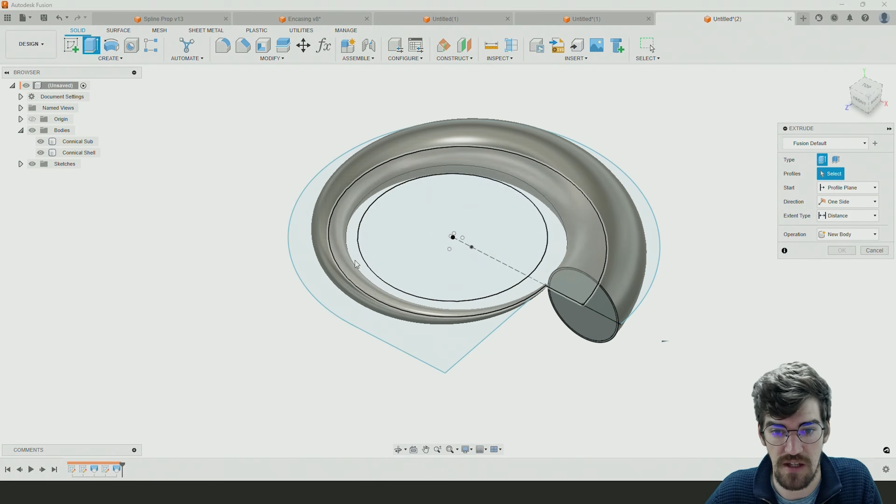So I'm going to use the extrude tool to extrude the entire perimeter of the shape in 2 directions. Rather than just going up in one direction, I want the center plane to be right in the center of the cutout, because that's essentially where I wanted to split that later on, right at the origin plane itself. So I'm going in 2 different directions with 2 different values.

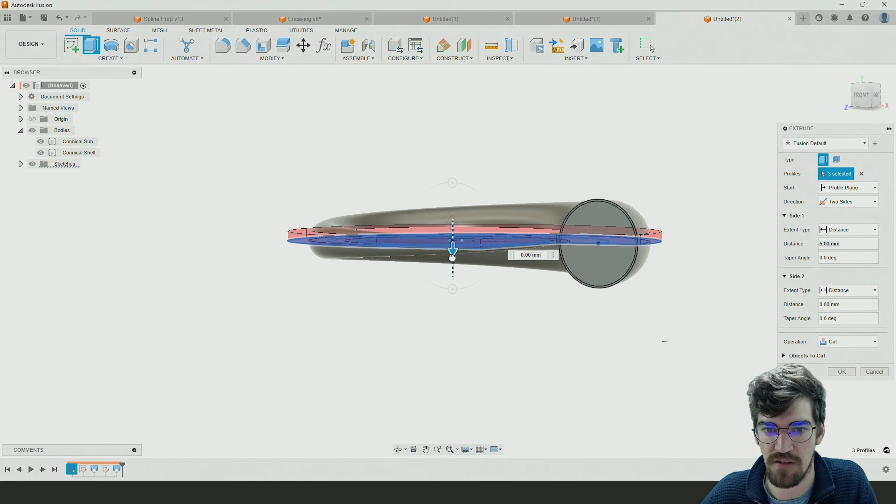So to begin with, I'm going to use that same profile, and rather than going up in one direction, I want the extent to go 2 sides instead of being symmetric. I want slightly more material on the bottom than the top, so I can drive each side independent of the other. I'm going up by 5 millimeters and down by about 10. Rather than cutting, I want this as a new body.

I want this about 10 to begin with, and we can adjust later on down the line. This doesn't line up perfectly just yet, but that's just because I've guesstimated things at the moment. Using parameters later on, we'll rectify all of that, but we're just trying to get things more or less in location for now. So new body, hit OK, and that should be that.

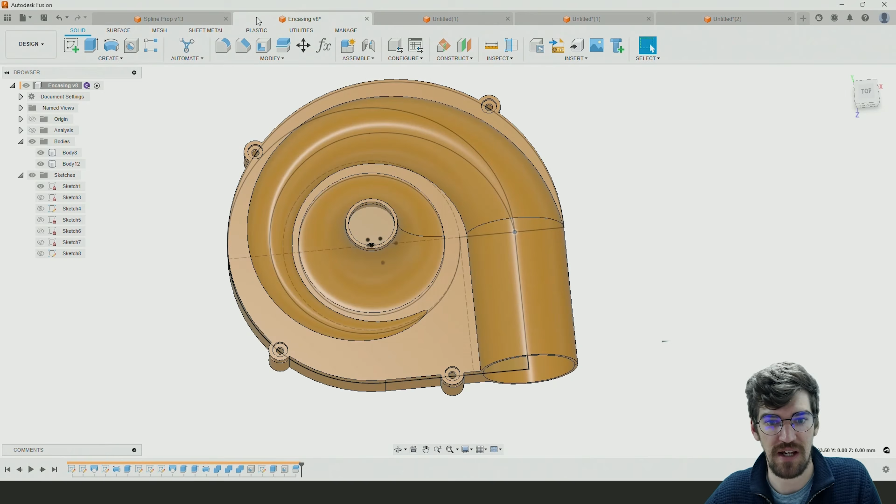The last element I want to create is the cone itself. As the air comes in or out, depending which way we're wanting to propel it, we want a cone that's pushing or pulling air in from the top. The profile of that isn't too dissimilar from the profile we created for the spline. It's pretty much the same, bar a few extra elements, which are going to be the way we push the air out from there.

So we're going to create another 2D sketch on the front plane once more, just to keep everything aligned to itself. And to analyze this a bit better, we're going to sketch it out to begin with and then start to bring the different elements back together.

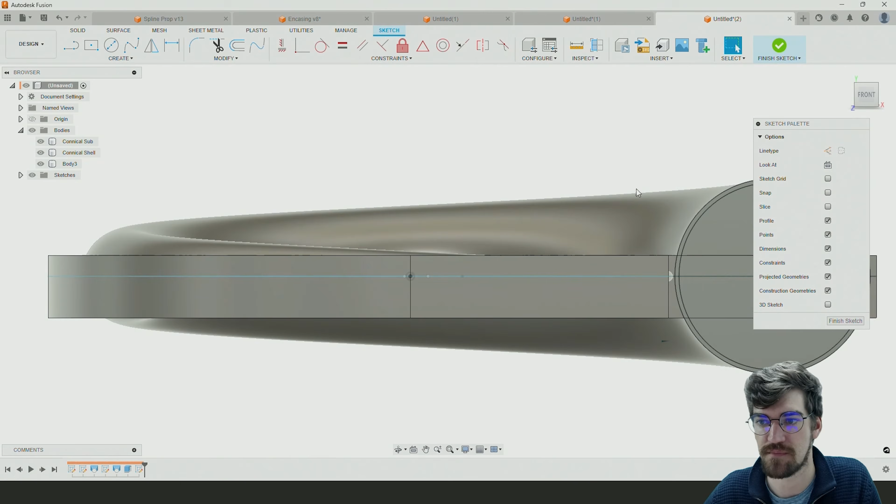If we're ever creating geometry or a sketch inside of any objects, we might want to slice the geometry that's currently in the way. In this case, we've got a sketch plane right in the middle of the part itself. So in the sketch palette we can just slice the graphics, and that brings us right to the sketch plane, slicing up anything in the way and giving us a section view as we go through.

From here, we can go in and create the center line that's going to be revolving around our component. I'm going to go straight up a little bit below, since I don't want the part sitting right on the horizontal line. The horizontal, or origin, is where I want my split to be later on, so for this one I want to go a little bit lower down. Then I'm going to go straight up by whatever height I want my propeller to be, or that needs to sit inside of this.

We're going to do a similar process again where we go straight out from there, then up. We'll have a blended curve somewhere along there, and then a similar thing where we've got the external perimeter. We don't have to worry this time about the cylinder itself—just the blade sizes, at least for this case, and where the cone itself starts, where the blended curve begins.

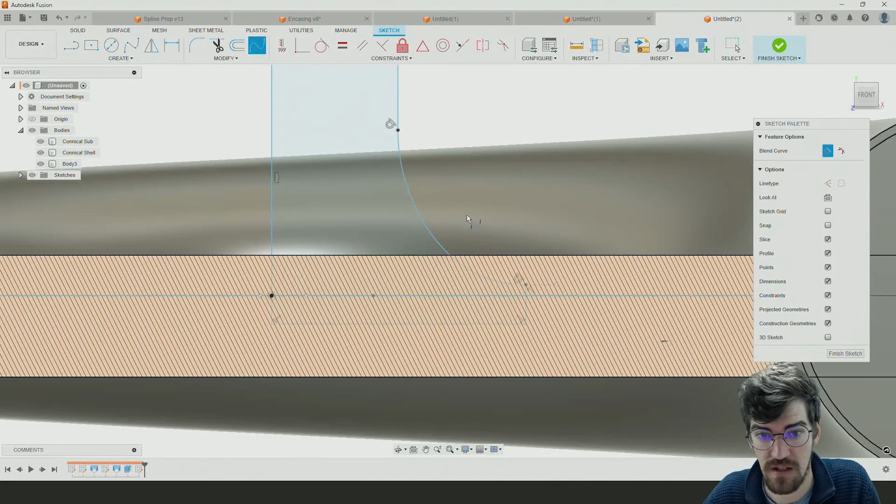So again, I'm going to go straight out externally, create it as a construction line, and then blend a curve between those 2 points—between there and there. So we've now got the shape, the void that we want inside. Again, we'll use parameters to worry about the sizing and shape a bit better later on, but we've got the rough shape we want for this particular process.

We then want to offset this ever so slightly by whatever thickness we want, whatever our nominal thickness is along the component itself. To do so, we can use the offset tool inside our modify panel, whereby we can either offset an entire closed perimeter or an entire chained perimeter, or by deselecting chain selection, it will select a single edge at a time.

I'm going to do that towards the outside, and I've established that I probably want about a 2 mm thickness, at least for now, for the shell itself. Something like that should be good. If any of this geometry ever changes, the offset should change to adapt with it. We then want to close that shape off as well on either end.

And then that is set nice and neatly from there. But that's not all we have to this, obviously. As we've seen before, we've got not only the diameter of the part itself, or the diameter of the spindle in the original sketch, but we've also got an offset.

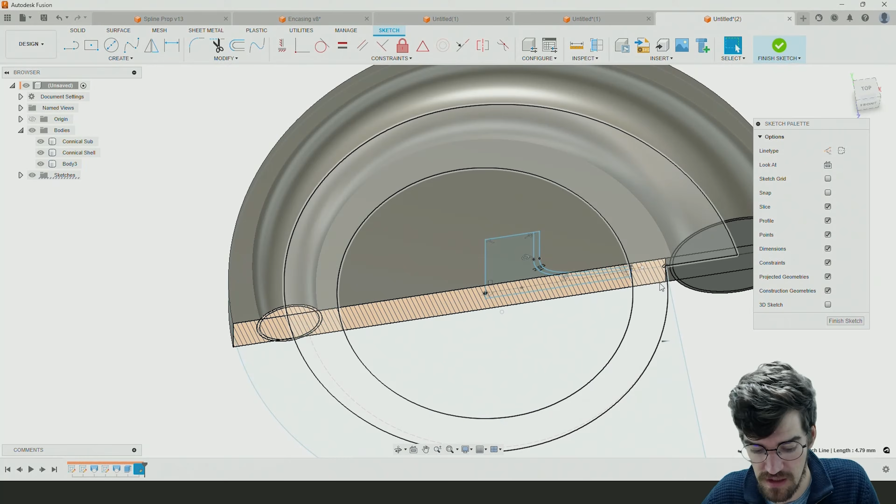If I drag this out a bit further, we've also got an offset that we want for a channel to push the air straight out from there. That we essentially want to be equal to a certain value, which is going to be the height of the blades themselves. Since we're going to be using this inner profile as a cut, as a void, we want to be able to cut out the void that we want for the air to disperse.

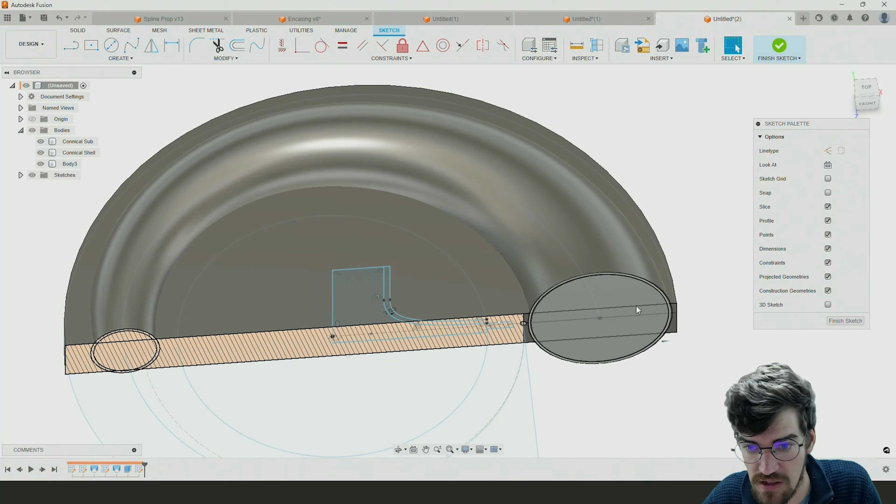Inside of the same sketch, we want to include a bit of geometry that's going to go all the way up to a particular point over here. That's going to act as the void that cuts through the channel and ensures it goes all the way up to the center line, at least to begin with, until it can intersect the cone of the void itself, all the way up to at least that point over there. I'm eyeballing this for now, but with dimensions later on we can ensure that's there.

I essentially want this channel to be equidistant on either side of my origin point. So from this angle, if for example I set that the thickness of that channel needed to be 3mm, I want that to be half on the top of the origin and half on the bottom of the origin. So I can go and grab the end point, the origin itself, and the end point of that line, and say that always needs to be equal to that value divided by 2. Parameters later on down the line we can adjust as well.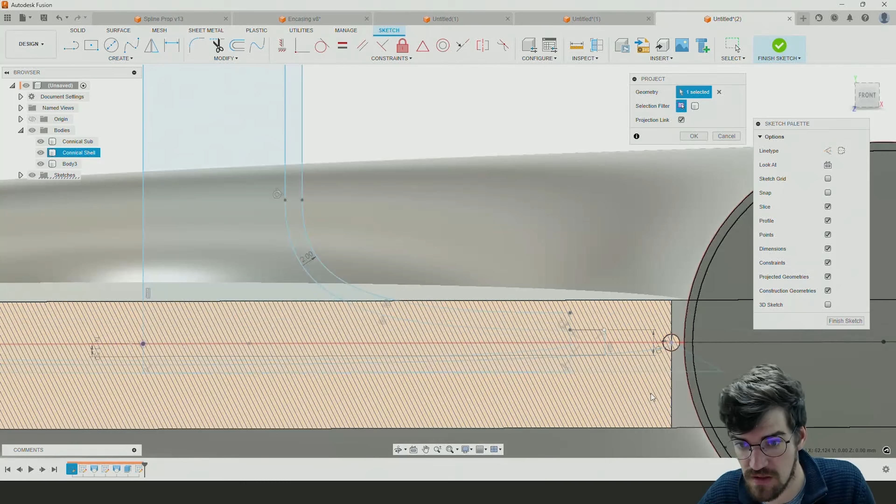That's decided to throw itself off a cliff. So we're going to go that way around and ensure that this line is always going to be vertical. That should fix that a little bit. And if we really wanted to, we could probably project this point over here using projected geometry and align that to the projected geometry.

If I've kept the projected geometry on, let me try that one more time, hit OK, that will keep it there. Using a coincident constraint, I can create a coincident constraint between that line and that point over there, and this will always be in line with that point. So if that point ever moves, which it will, we've got a profile that we can make use of along the way.

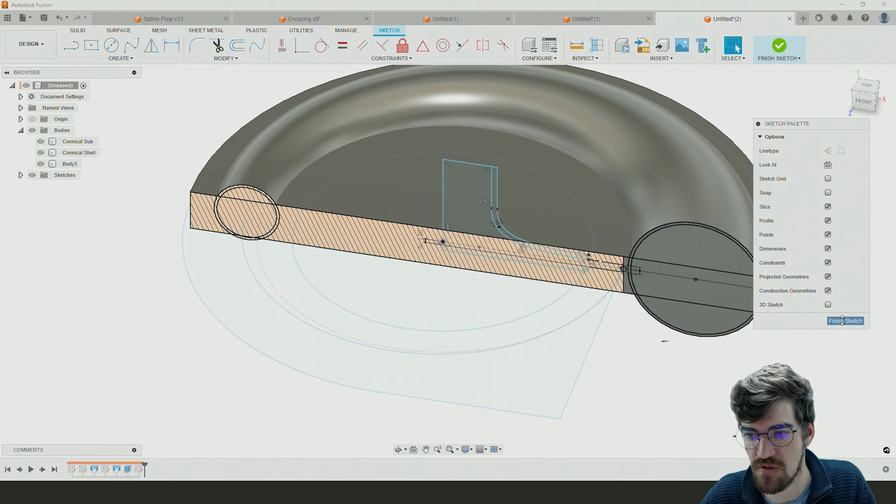The other thing might be that this thickness we always want to be equal to or come up to that surface over there, and we can play around with those again a little later on with parameters. But lastly, I'll hit finish sketch just to drive this home now. We're going to go and close that profile off.

Using a revolve once more, I'm going to grab this profile, which is going to be the surface, and the axis is going to be there. We're going to create this as a new body once more. Using the same sketch, create another revolve around this body, also as a new body for now.

We can then go and ascertain which body is which once more by renaming each of these. So this is going to be the enclosure body, let's call it the enclosure body. We're going to have the shell, so the cone shell. We're going to have the cone subtract.

We essentially want to go and merge anything that's going to be subtracted together, and anything that's going to remain behind needs to be a single body as well. So using our combine tool, available in the modify panel, I'm going to say, well, my cone subtract, my conical subtract, and my cone subtract, I want as the same body.

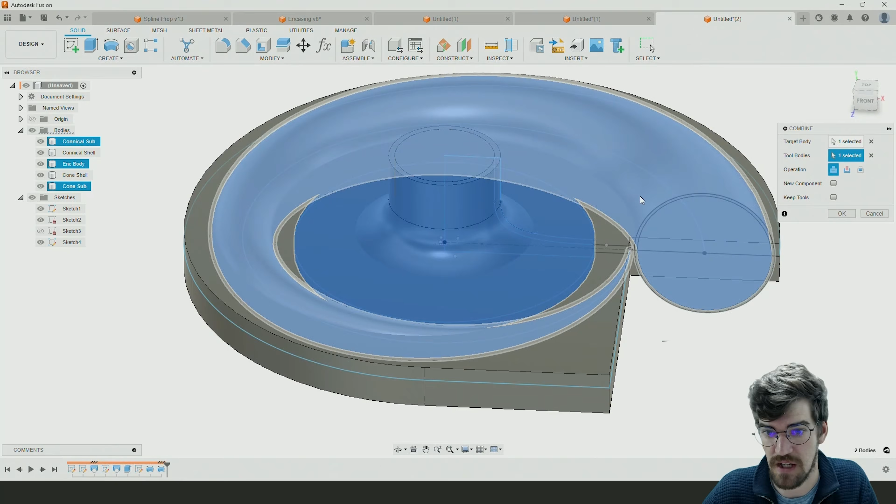I just noticed an error that I've made over there. I'm just going to say that I want these two — they're not going to be able to join if they're not making contact with each other. So if I hit OK here, I should get an error, which I didn't, surprisingly. But what I do want to do is make sure that that is connected. So let me just rectify this one very quickly to include that over there.

And then this combine, I want to combine. Let's try that one more time. Delete this one very quickly.

Use the combine tool to combine the sub and the cone. Try that one more time. Wrong one. Try this again. There we go. And that one.

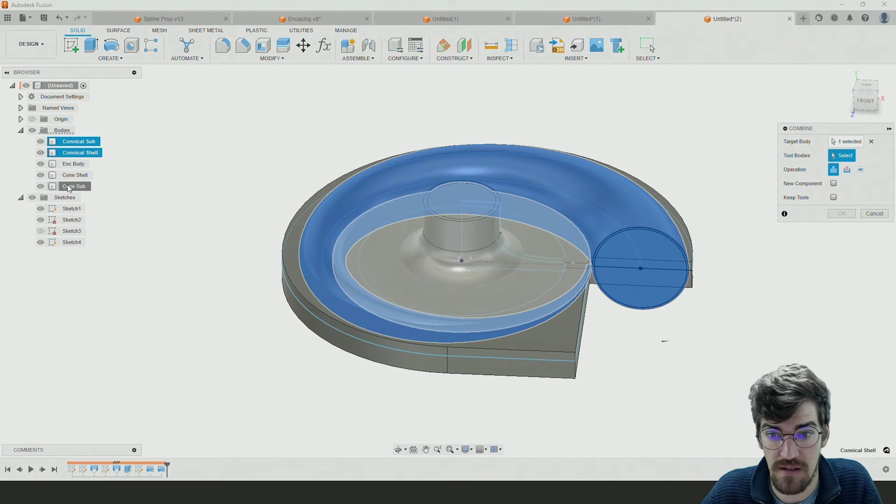Combine the two together, so they are now one body. If I toggle visibility of everything else off and just that one on, I should see that they are one body, which they are not currently. I've got the two shells connected.

Apologies, let me edit that one more time. Must have selected the wrong one. You probably saw that. That is the subtract, and I want to combine that subtract.

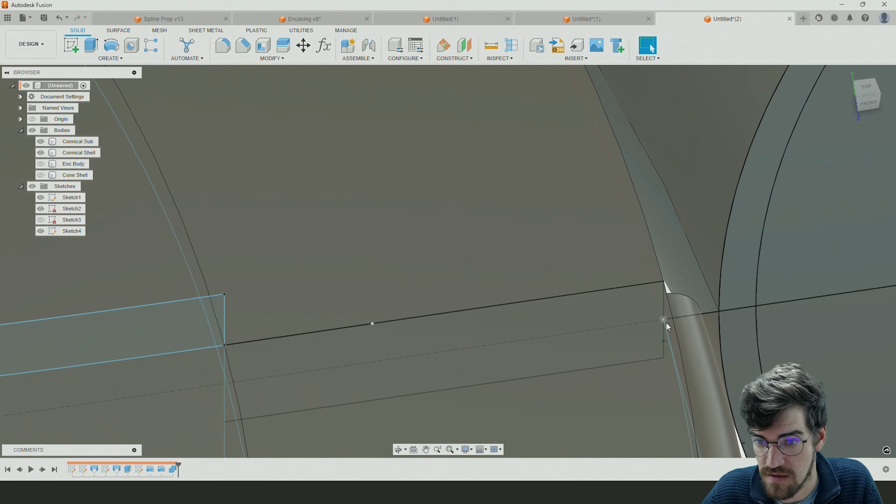And that's a slight issue that we have where the reason we're having this issue is because if I toggle the visibility of the shell element off, this cone over here is merging to nothing, and essentially because that's basically an infinite point, an infinitely small point, it's just struggling to grab those 2 points over there.

So what we do want to do is, rather than having that as it is over there, we might want to extend in that sketch that we created over here, rather than those 2 points being coincidental with each other. I'm going to delete that point and just move this line ever so slightly along, if it will let me. Otherwise I'll just delete that line and make sure that it's ever so slightly further along than that point over there. Might be 0.5 mil or 0.1 of a mil or something like that.

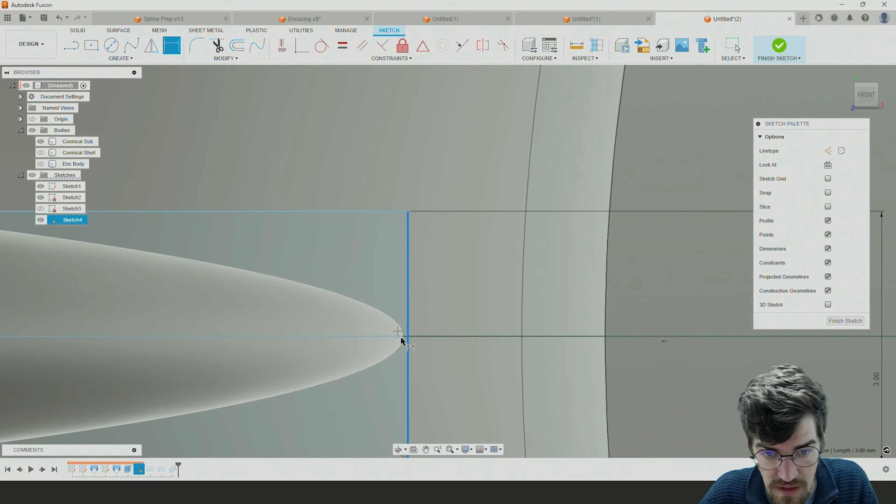So I'm going to dimension between that point and here. And I'm going to say it's going to be 0.1 of a mil. That way the cone itself starts, and it won't be very long after that where it then becomes its own geometry. And that way around, with the conical shell there, which isn't the one I wanted.

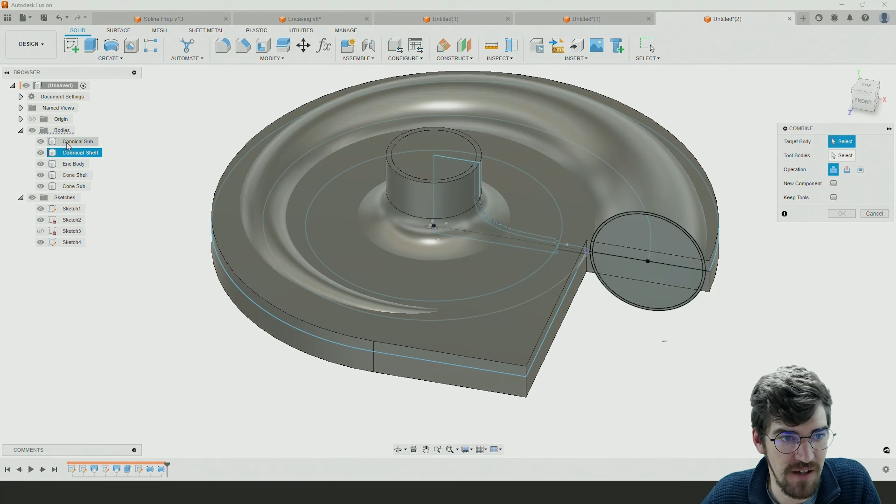I'm going to re-attempt this one. So that once more we can use the combine tool and grab the subtraction conical and the subtraction cone, and you can see those two merged together are happier this time around.

So if I toggle visibility of these ones off, we should now have this as a single component, or a single body rather, which is the subtracted area that we want, with the thickness of the channel and the output, as well as the rest of the components, which we then want to go and merge into one other final component using the combine tool.

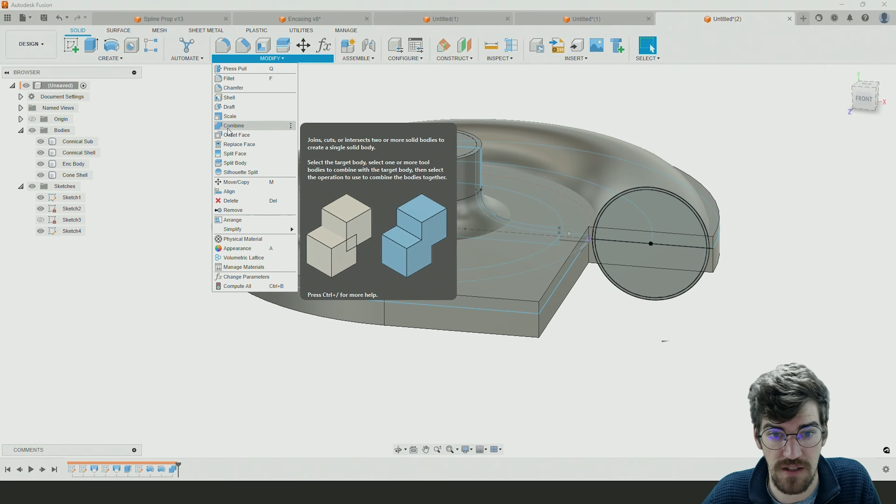I'll go and grab the conical shell, the enclosure body, and the cone shell as a single join body. I can go and rename those as well if I wanted to, but I've now got a solid component down here and another solid component over here.

And then with the final combine, I want to take the volume of my conical subtraction and take it away from the shell as well. So final combine is taking those two shapes and saying my target body is going to be the shell, and my tool body is going to be the subtraction, and I'm going to subtract the one from the other.

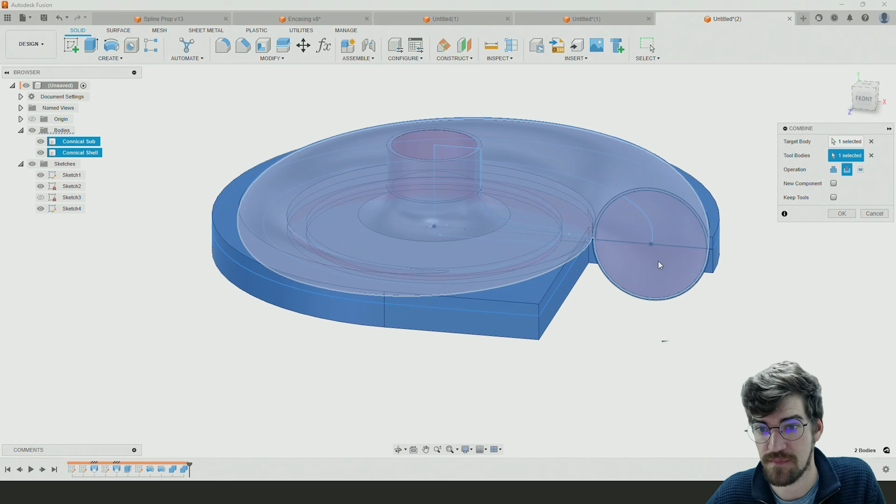Might have a few seconds to think about that, but we've now got, again, not parametric yet, but we've got pretty much the shape that we're wanting along the way. We'll come in later on and fill this in a bit better, but we've got an external shape that has most of the componentry that we want in here, and we can use a very quick section analysis to have

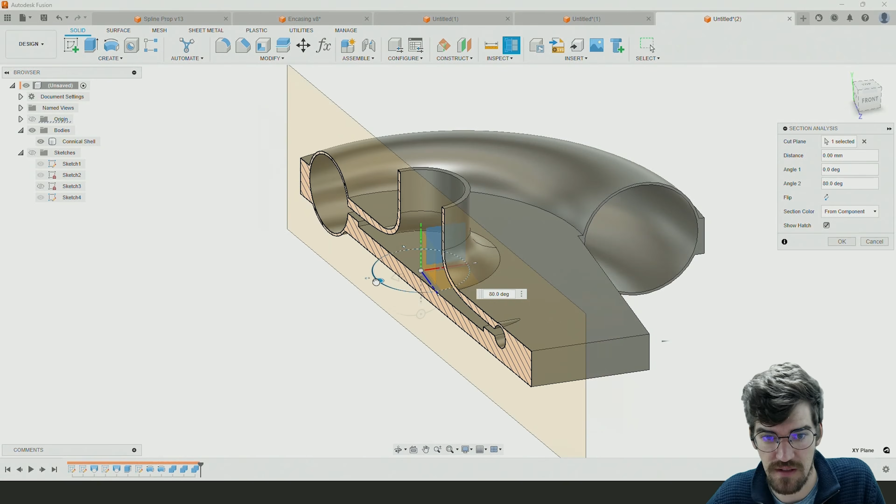a look at that and see that there is in fact a channel all the way through. And as we rotate this channel around using the dials on here, we can see that that has a nice gap all the way through the component.

And that's essentially what we want to show for this portion of the video for episode 1. Again, the next episode, the next video we're going to be making is going to take a look at a bit more detail as to how we can start to make this a bit more parametric, looking at a few equations we can begin to look at to drive this a bit better.

But this is still a pretty solid component that we can make adjustments to widths and heights and so on if we needed to as well throughout the creation of this, just using sketches and a few small parameters along the way without using any equations really from within there. So thank you very much for your time.